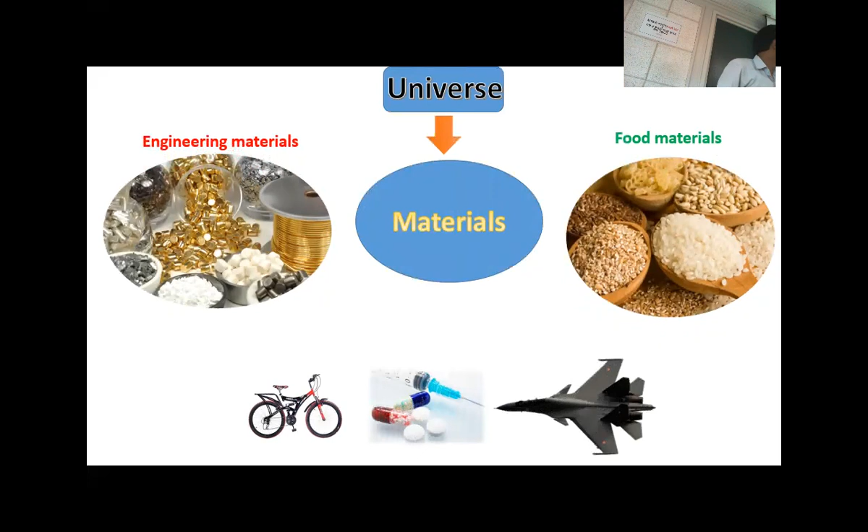Just one for engineering purpose and one for food purpose. These are for civilization, very necessary. It's very introductory, and these materials give us the modern civilization where we are standing today. But interestingly, nature provides these materials in the form of different ores or in natural forms.

It is not as it is that we are going to use for engineering. For example, this is a laptop. We are using silicon. We obtain silicon from ores, but it is not usable as is. So we need a lot of engineering—material engineering, chemical engineering, mechanical engineering, nano engineering. So many things are needed.

So what is the problem? These ores, we need... there is a different engineering, and in science there is a concept. Suppose this is my pen. If we just go and dissect it, the property of the material is not the same everywhere. You can very easily understand this.

Suppose this is the same material, I'm showing it by different colors. Just go and divide it. The properties—I'm talking only about physical properties here—here and here are not equal. It's totally different, maybe sometimes amazing.

You cannot believe it, but the property is different. Here is the same, the only difference is size. Size means you have to understand you are going to divide it, many times through fragmentation. You are getting my point? Sure.

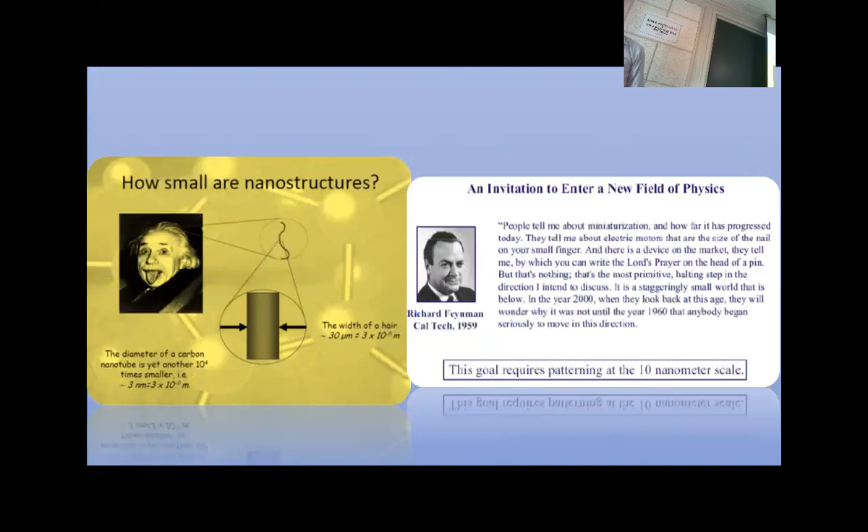So next, what is a nanomaterial? You may be somewhat familiar with the term. Any material—this table, this laptop, me, you, everyone—if it has a size in the range of 1 to 100 nanometers, then it is a nanomaterial. So the definition is that a material must have a size from 1 to 100 nanometers. And the science related to these nanomaterials is nanoscience.

The technology related to and produced due to these materials, we call nanotechnology. So we have to see what is unique and new about these materials. Suppose this is my pen, and if we go to the nano level, what is the difference? Very interestingly, you get new physics, new electronics, and very high surface area.

We will discuss surface area in the next couple of slides. Then aggregation and agglomeration properties - for example, this is my hand, both have different properties, in this we cannot eat, in this we can. This is just an example of aggregation and agglomeration. Surface morphology - we have a lot of chance for surface manipulation in the case of nano, which we will discuss in the next slide.

New solubility - for example, if we have a material not soluble in water, if we go to a smaller nano size, the same material may become highly soluble in water. So we have the same material, but at a different scale, we get different properties. The structural formula may be different, with new surface properties like charge, tension, and hydrophilic and hydrophobic nature.

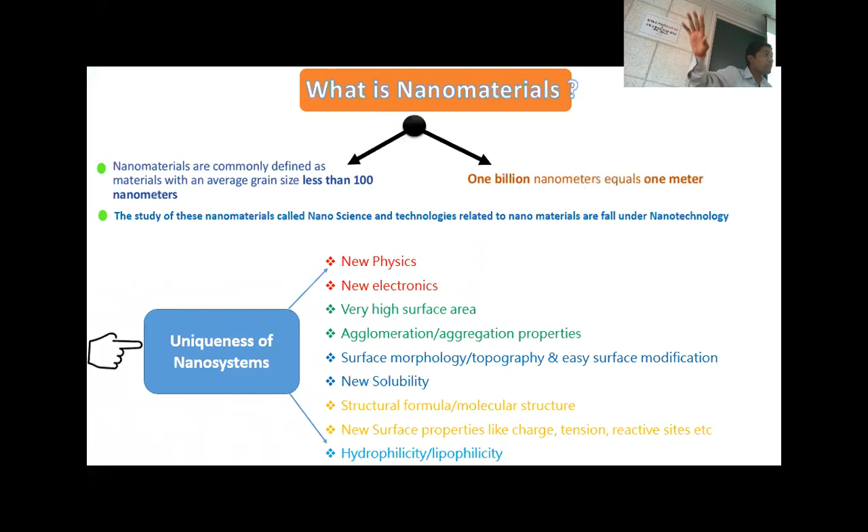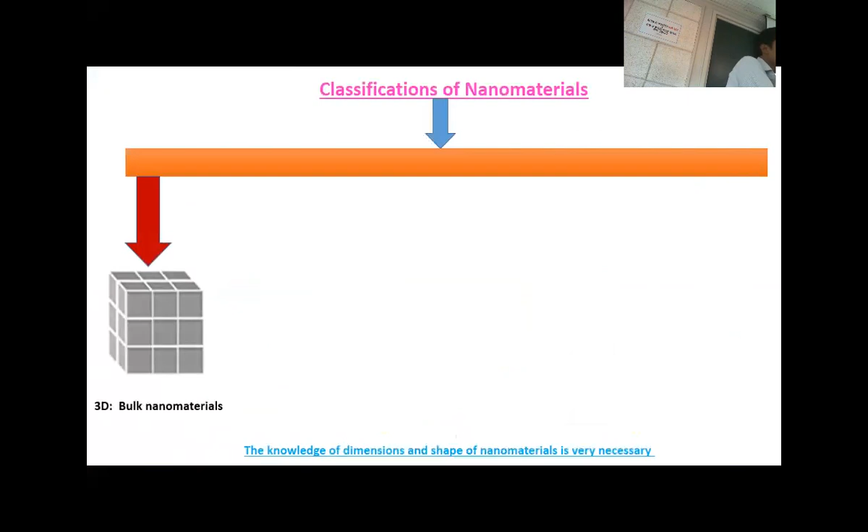So again we go toward classifying the materials - classification by type for nanomaterials. What type of nanomaterial is it? We can easily divide these materials into 4 categories: 3D materials like bulk materials, 2D materials like films and plates, and 1D materials like nanofibers, wires, and spheres. You have to keep in mind the shape.

Now size is just forgotten - now you are in the nano world, size is very important, shape is very important. Suppose you have a 2 nanometer material, but if the shape is 3-dimensional versus 2-dimensional, you may have different properties. So now we have added another point in our definition: the properties of nanomaterial change very significantly with size and shape.

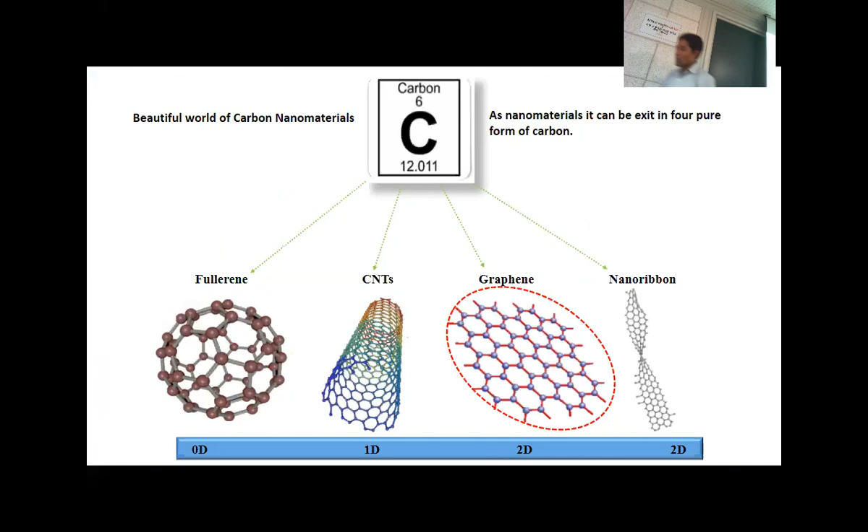So this graphene, now we go in this slide just for your recall. This all four materials can be obtained from the single graphene. So graphene is called the mother of all graphitic systems. How? If you have a graphene sheet, if you just layer it, this becomes graphite. If you just roll it, it becomes carbon nanotube.

If you roll it in this way, it's fullerene. It is not just a theory, it can be produced in a chemical lab. If you adopt different kinds of processes, graphene can produce this. You can produce this, it's quite difficult, but you can produce it. So this means graphene may contain these properties.

So all these three properties are one, that makes graphene much more exciting than the carbon nanotube, because carbon nanotube was discovered previously. It created so much hype, so many applications have been developed. But when graphene was discovered, all its properties were much better than the carbon nanotube.

Reason? Again, we have the role of surface area. Here, if we roll anything, the surface area again goes down. When we just spread it, the surface area goes very high.

Again, one other thing, it was discovered in 2011 or 2012. This is another new material, graphene nano ribbon. If we cut this from here and just try to tilt it, it shows a totally different property. So this is another new nanomaterial, graphene nano ribbon. It's a deformed form of graphene, but its properties give so many new things. What can be obtained after the deformation of graphene? So now we have five: fullerene, carbon nanotube, graphite itself, graphene, and graphene nano ribbon.

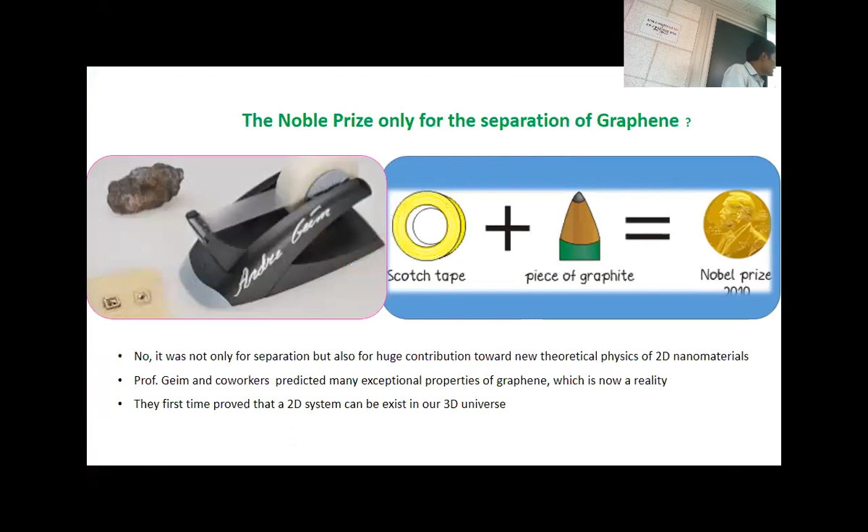Here is the method: they separated it, they took a stone of graphite, rubbed it on tape, and applied many things like chemicals. For the separation we will discuss. This simply shows just tape and a piece of graphite, and they got the Nobel Prize. But this was not only for the separation. As I told before, this is due to the separation and the development of excellent predictions and physics of these nanomaterials. That is the reason they got the Nobel Prize, and they predicted correctly that two-dimensional materials can exist in our three-dimensional world. It is very interesting, after two-dimensional materials, so many materials have been discovered, and they are playing a lot of roles in applications.

So another important thing: nowadays the traditional TV and the LEDs used in our homes are going to be removed within 5 or 6 years. Here, if we go to the nano size, suppose you have graphene of 2 to 10 nanometers, then they show amazing different colors. The same graphene. You are getting my point?

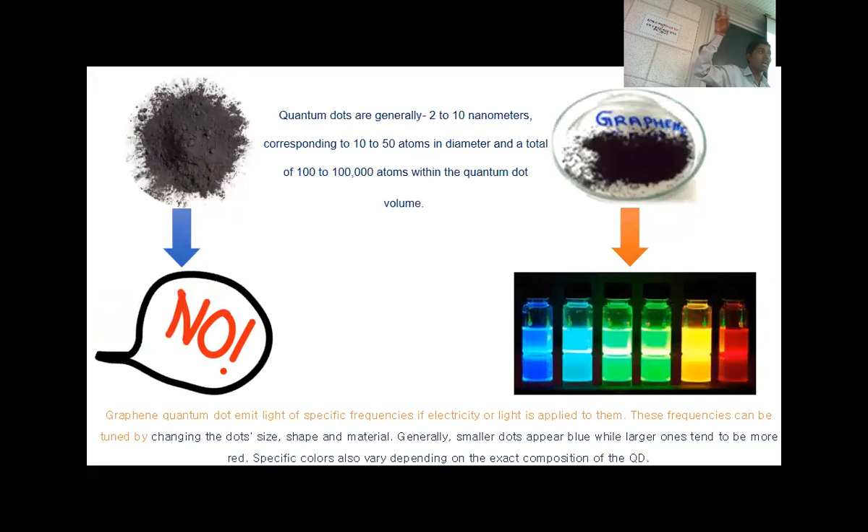And it is a general prediction: when you go to the higher size, you get red color. When you go to the lower size, you see blue color. It's fantastic, with many applications, and now scientists are trying to manipulate these things for artificial photosynthesis. That is very important for the capture of carbon dioxide. So this is the application.

Here, graphite has just normal conductivity, but this has huge conductivity, like no other material in this world. But the problem is that we cannot control it. Till date, we are not able to control the properties of these materials. That is the need for further engineering.

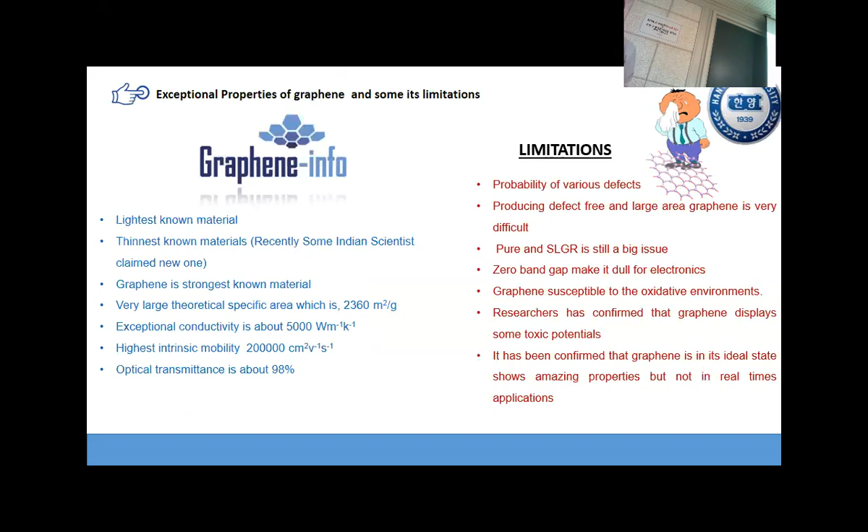The engineers are working on it and have had good success. If we can just push this, then it becomes an amazing material and we can replace all the silicon using this carbon. So this is the problem.

Another problem is now the research that is going on. Previously it was predicted that it's a wonder material, very amazing for the medical system and like that. But now it has been discovered that it also shows very, very low compatibility with the human body. It means it is somewhat toxic. So there is a need to finalize whether they are toxic or not, whether they are biologically active or not.

That's a matter. Another thing is there is a need to further create ideas on how to produce graphene beyond graphite, because the problem with graphite is we have stacked layers. That is the basic problem, because with the method produced by Andre Geim, in one day you cannot produce 1 gram. They got the Nobel Prize because it was an outstanding idea.

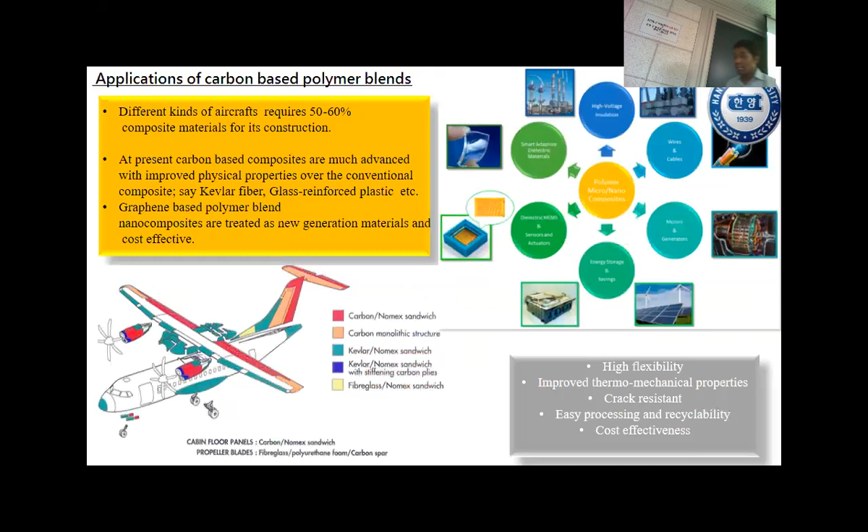Just a very common example. We are all familiar with polycarbonate. Polycarbonate is everywhere in our homes. So these are the different applications of polycarbonate. But what is the problem with polycarbonate? If we have iron and coat it with good materials, we can use it for 10 or 20 years or more.

But with polycarbonate, what is the main problem? After 5 or 6 years, these are the reported problems: swelling, fracture, and cracking. So scientists get 100% recovery if we use these nanomaterials, because if we use single layer graphene, it will be transparent. So the transparency of the polycarbonate will be maintained.

Now the cost may be high, but in coming days, if the research keeps going, it will be much cheaper. And cracking we can recover using these nanomaterials. So our aim would be that we can reform or reconstruct these materials to be reused and recycled. A huge amount of polycarbonate is produced every day, every year, so we can recycle these materials by using different kinds of nanomaterials.

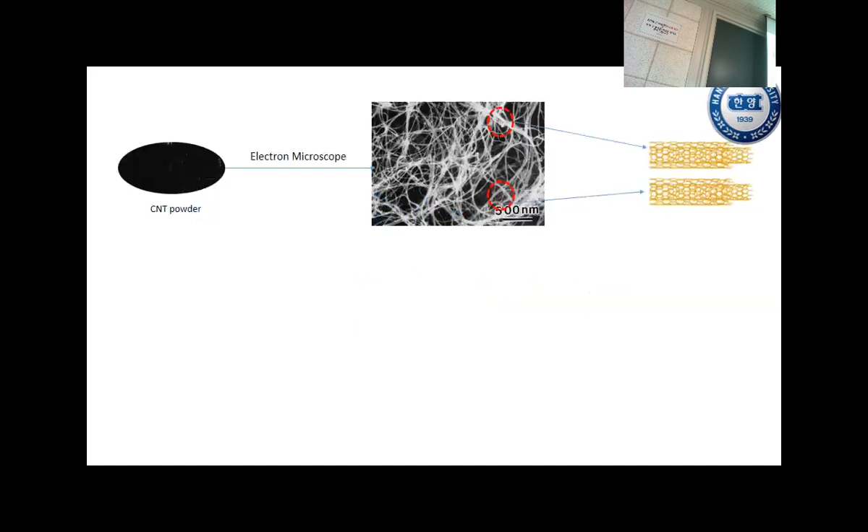Now we come to another example of how it becomes very mechanically strong when we use carbon nanomaterials, especially carbon nanotubes. The carbon nanotube is just like powder. If you purchase it in a bottle, it's just powder. In the electron microscope, it looks like that. This is its structure. Suppose this is the matrix, and this is our fiber. Without it, they are just separated alone.

When we mix CNT, due to the property of CNT, they get entangled. Here you can see. So when the layers are tightly entangled, thermal and mechanical properties increase hugely. This is an MIT report; I have given the references at the end. They propose the mechanical properties and how the matrix and the filler interact, due to this tube-like nature.

Obviously there is a need for processing. You cannot just mix in the carbon nanotubes and get this property. There is a need for some processing like consolidation; we will discuss it. So these are the properties we can obtain in real time for neat polymers. So we can stop producing new polymers, or needing very advanced polymers. We can manipulate existing polymers for elevated and advanced applications using these nanomaterials, because these materials are just advanced.

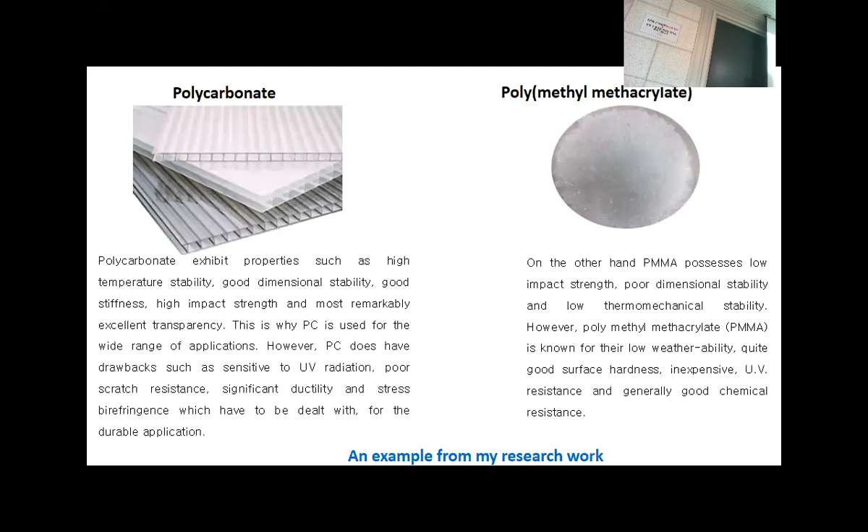So we can resolve it. It is just a prediction, just for the prototype application. But yes, we can produce it. You may ask why we mix. What is the need of mixing? PC is very costly. If we have to produce 10 kg, the price will be very high. If we mix, first is the price. Second, PC is sometimes sensitive to UV radiation, but this is not. So if we mix in the proper ratio, we can manipulate the properties of these materials.

So this is the result. It's just for your introduction to how graphene works, how it fills the gap. You can also find my paper on the internet, showing how the cracking has been removed due to the introduction of these materials. Here we have the neat PC and PMMA. We mixed other samples in different mixing sequences, and we are getting this kind of tensile strength.

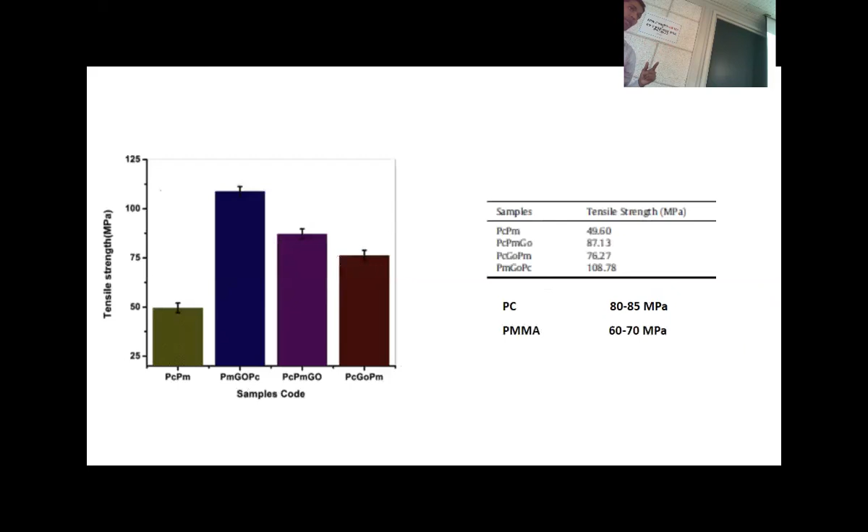So we can control it. Yes, obviously a lot of work is needed. We can work with a lot of systems, a lot of polymers, and produce advanced composites in our lab. At present they may be prototype applications, but in coming days they will be very important for advanced engineering, because engineering and science keep changing. So we cannot just wait on conventional polymers. We have to do something.

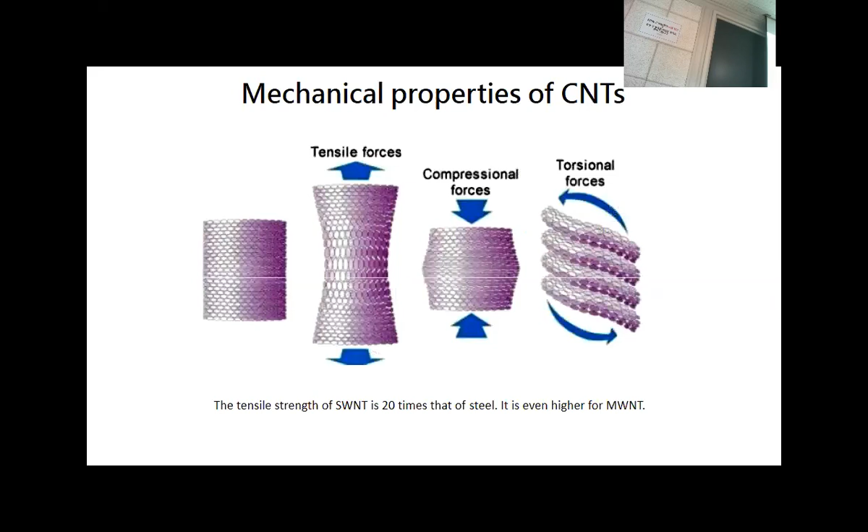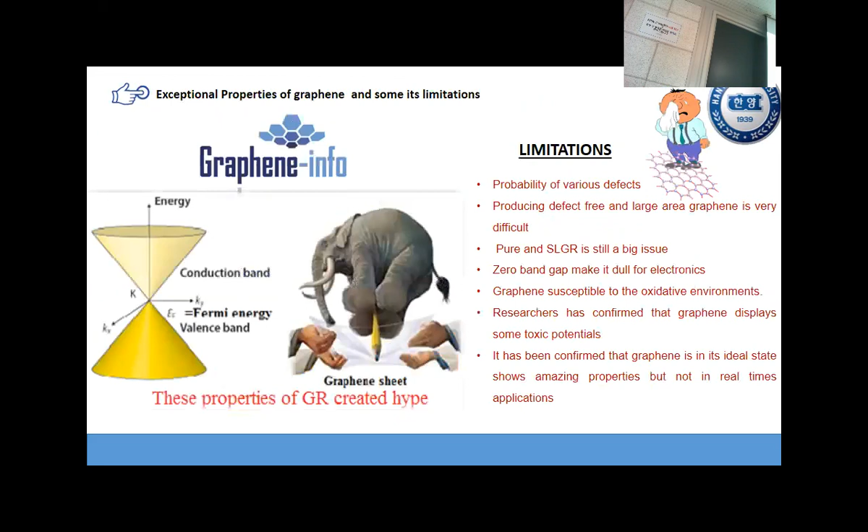These products are in the market, but the cost is very high. Yes, at this point they are in the development stages. Right. And what are the barriers for real production? You mentioned several points, but in your opinion, what are the real barriers?

The real barrier is obviously production: bulk amount of production in pure form. Pure form, without any defect, with a very consistent geometry. Do you think it's possible? Yeah, it's easily possible. It is possible.

What do you suggest to mechanical engineers, in terms of design of certain structures or certain materials? First, it is very interesting if you just Google these materials. Mostly, the work is performed by mechanical engineers. Most of the calculations are performed by mechanical engineers. So this is the new world for the mechanical engineer.

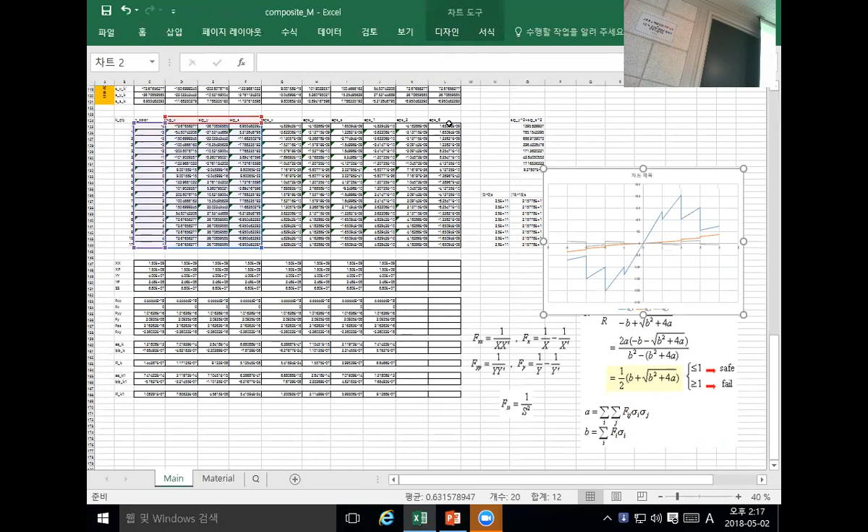Last week we programmed failure index based on the Tsai-Wu failure index, failure criterion.

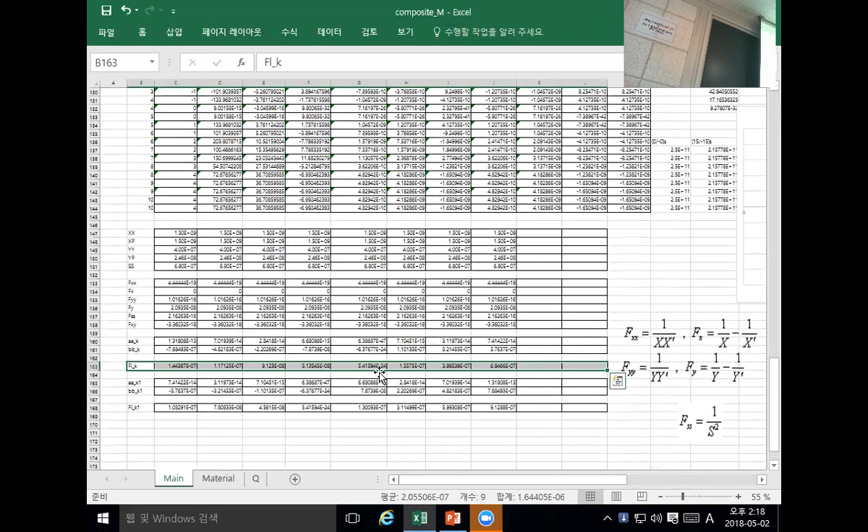Okay, let's see. I like to add plotting graph, failure index. Say this one, I like to. This is the failure index K. I hope you can see. Failure index K, failure index K1 means that each ply you have a bottom and top sub positions.

So we do have a name, and let's say this one. The name was what? F-I-K, so F-I, K-ply, and F-I-K. Why not?

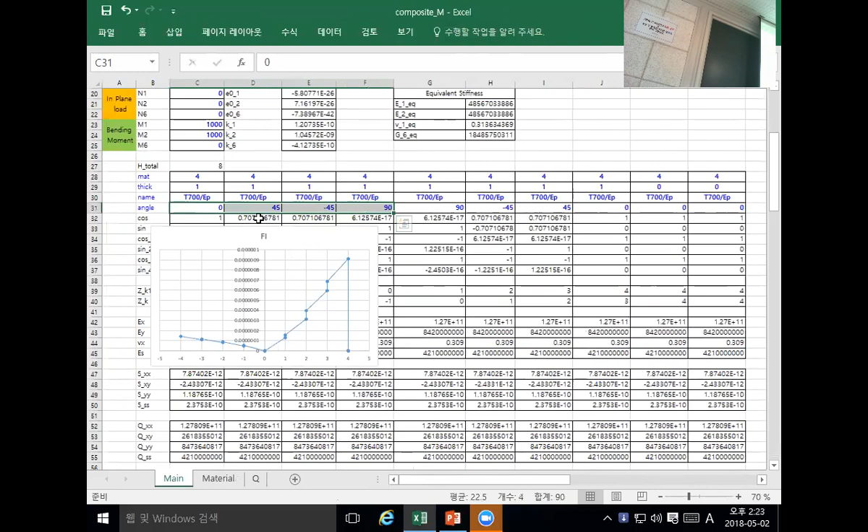Let's double check whether this graph makes sense or not. Well, thickness is chosen as 1 for each ply, 1 millimeter. And the angle, quasi-isotropic, 0, +45, -45, 90, and symmetric. And now we have moment 1 and moment 2. Let's start with a simpler load.

And N1, as you can see, well this is nothing. This one, top and bottom is symmetric. This is the bottom, and this is the top, and this is all symmetric with respect to a neutral axis. Why is this one higher?

Because of this 90 degree. This 90 degree is subject to N1, one directional load, 0 directional load. So this 90 will have a weaker strength. That's why we have a weak, higher failure index. Higher failure index means higher stress.

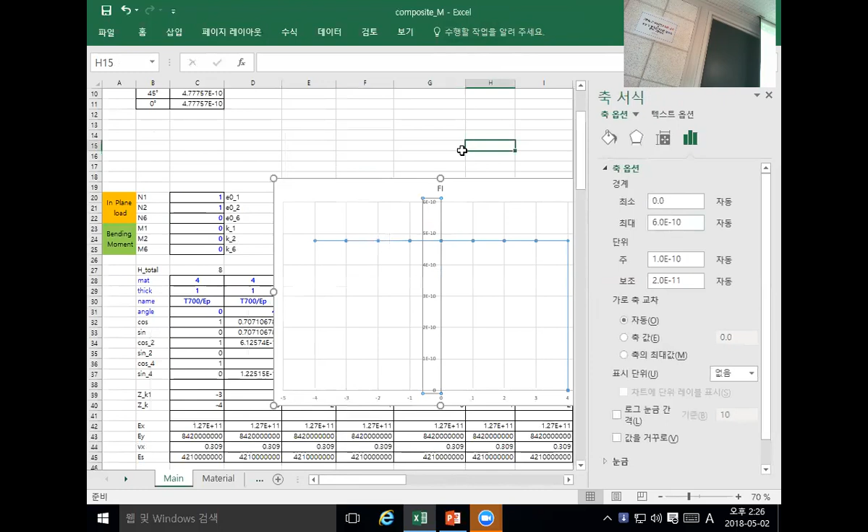Now you can see that this is a very important procedure. Look at the value, okay? Look at the failure index. Failure index is up to about 5, 10 to the minus 10, okay?

Which means that if we increase this much, increase the inverse of this, say we increase approximately, okay, 5 minus 10, let's see what happens.

Now you can see that all the failure index goes very close to... it's not quite correct.

Why is top and bottom different? Well, this is the...

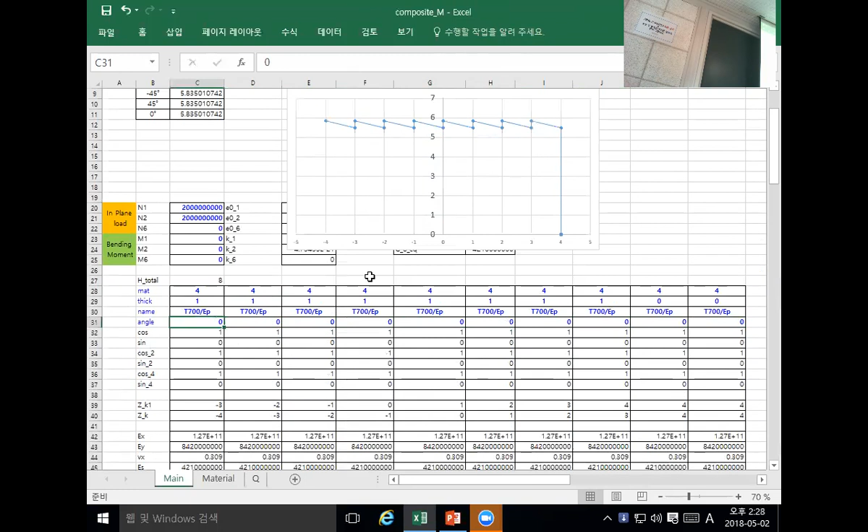Okay, let's change it to all zero. Well, as I emphasized before, we are often facing some bugs, and I'd like to share with you how to fix the bug together.

Say we apply N1 and N2, and all the plies are 0 degree. When you have some bug and error, how do you know this is a bug and error? Well, first you need to have a rationale. How come it's up and down, they are different. This is certainly not right.

So to find what caused the error, we always need to simplify the problem. Simplify means let's make all the plies 0 like that, and let's say even simpler. This is okay, and now, oops.

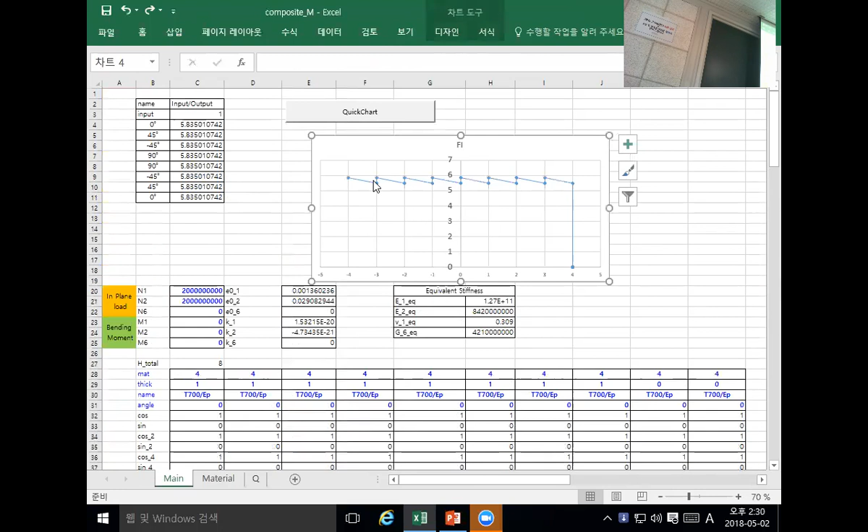Oh, I'm sorry, I didn't pay attention. 5.4, 5.8. Okay, let's go, and then okay, so this is the point. Here, failure index, the bottom one is 5.8. Top is 5.48, and second top, so this one is not continuous.

That is not right, so let's find out. Here, this guy is the A and B, and these A and B, in the theory, we have A and B to calculate R, right? And this A and B, and this A and B, they are different. So I think this one refers to this, and this B refers to, okay.

Now this one, how about the stresses? Well, as you can see that this stress and that stress-wise, okay, the top and bottom surface of each ply, they have the same stresses, but why is this one different?

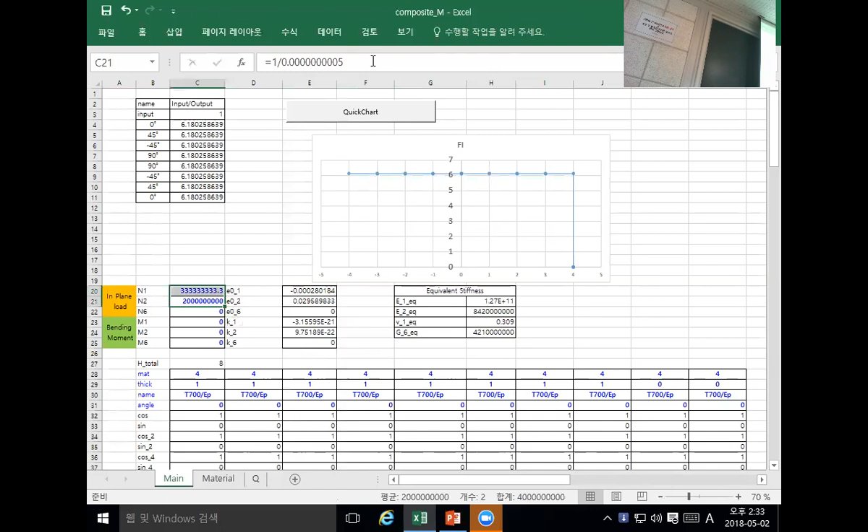Now what I'd like to emphasize is the failure index of 6. 6 means 6 times higher than strength. So then how much load can this plate, I mean the laminate, support? Can you easily calculate? Yes, we can. This is a 6. What we need to do is just divide by 6. Divide by 6, it's not a complicated procedure.

I like to give an engineering sense that, you know, all the failure indices, we have to design so that the failure index of all plies has to be 1. For that purpose, we just decrease all the load level proportionally. This is the important point. Proportionally, we have to divide by the same amount. Then this will just go up and down. This is an important procedure.

Now, this N1 and N2 is an in-plane load. What is the in-plane load? N1 in-plane load is the stress times thickness, right? In-plane load is stress times thickness. So let's think about this one.

Only in the N1 direction we apply this, and all 0 degree. And what is the thickness? Well, thickness now 8 has no unit here.

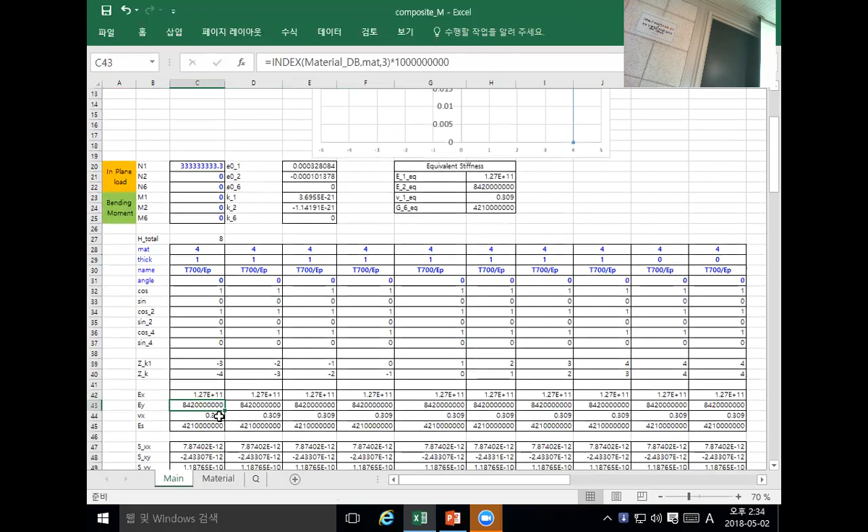Okay, the unit, we need to be very careful, obviously, in every tool, CAE tools and even CAD programs, especially in CAE tools, they don't have any unit system. We designers have to choose the unit. The unit has to be very consistent.

If we choose this one, for example, EX, EY, and all the material properties are in Pascal, right? So Pascal is the unit we chose, and then all the dimensions better be in meters, right? Meters, and load has to be in Newton. So if we say 1, meaning that this is 1 meter.

So this one, okay, let's choose thickness. Well, I'm sure we didn't pay attention to a real unit, but let's make it a real unit. Say, 0.125 millimeter is the conventional ply thickness. So 0.125, this is in meters.

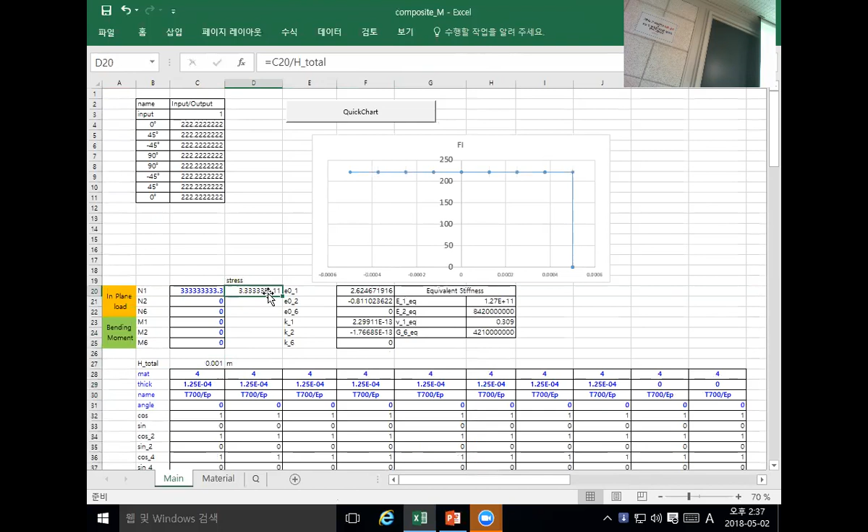So this is the 333 gigapascal, right? Gigapascal we are applying. As you can see, the failure index is 200. So what's the value? 222 point. Okay, so let's divide.

Then as you can see, failure index will be precisely 1. Then as you can see, this is the stress we are applying. What does this value, what is this value related to?

Okay, this is the 1.5 gigapascal we are applying. What is 1.5 gigapascal? Well, that is the strength he chose, 1.5 gigapascal, because this is the X directional strength, and we stack as many as we like, and we applied N1, but strength-wise, this is 1.5 gigapascal. So as you can see here, it reaches 1. I'm trying to explain what the failure index means in a simple way.

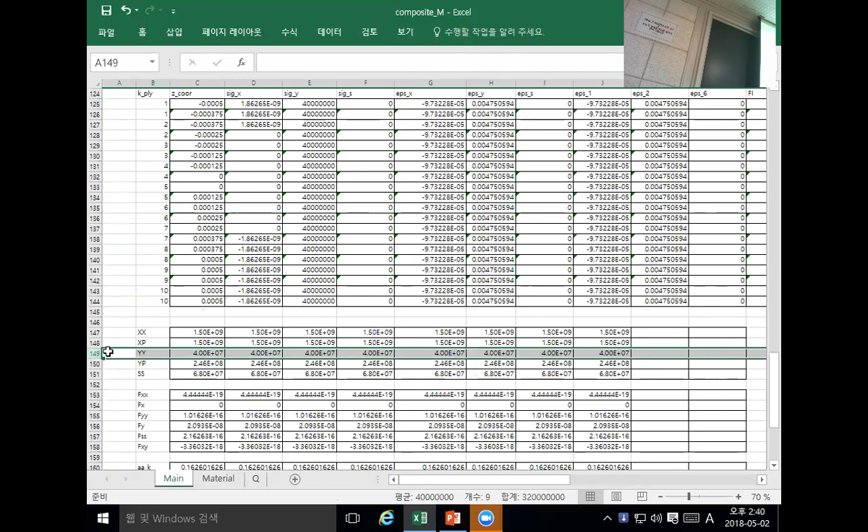We can increase the load by how much? As much as the failure index allows, then you can increase it to 1. And this is the amount in plane load you can apply. Stress-wise it's 40 megapascal in N2 direction, which means that this is 0 degree, and N2 direction, meaning 90 degree transverse tensile strength, right? Transverse tensile strength, I'm sure this is the y directional tensile strength.

That's the amount you can apply, and the material will fail at that point. Okay, so now you can say, you know, any load you can apply, any load, and how much failure index we have. Well, only one directional load is easy, but multi or biaxial load, such as this way, is not easy to predict.

So as a designer, how much do we need to apply by just looking at this one? There's a 1.158, and then you can divide by 1.158, and as you can see that now failure index reaches 1.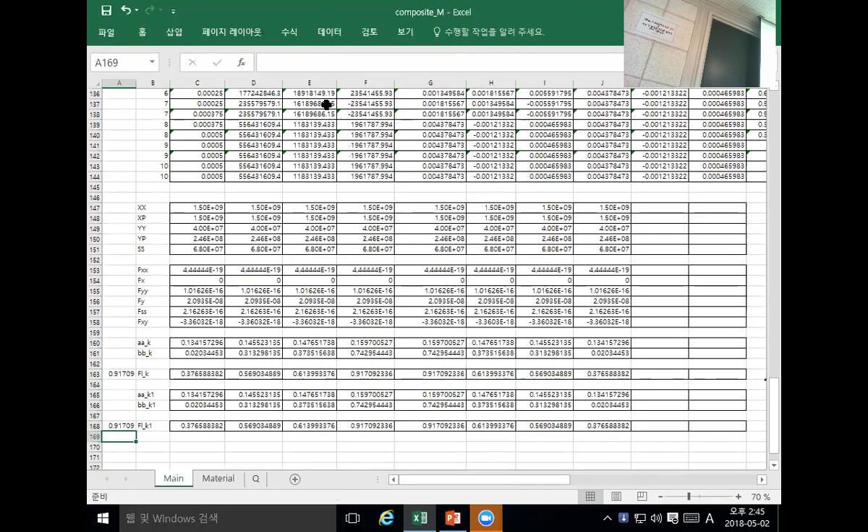Let's define the maximum of this failure index. So this is the maximum of a failure index, FI_k, and this one also maximum of this one. Okay, so let's say input, and this is the maximum failure index, maximum of failure, K, K1.

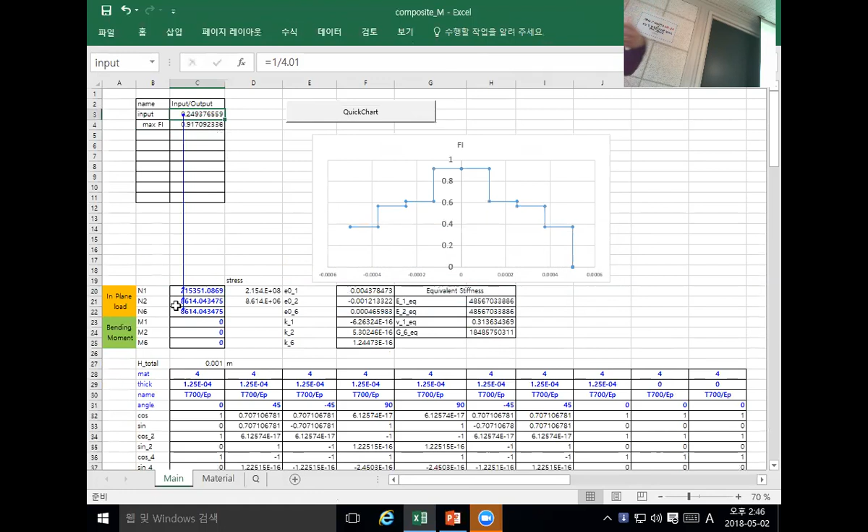Okay, what I'm trying to do is change this input and see how this failure index varies. It's certainly proportional to this load. Do you see what I'm trying to see? And as you can see, this input value goes here, proportionally increasing the load, all the way you go, and then come back to this failure index. So whatever we change, as you can see, the failure index is increasing.

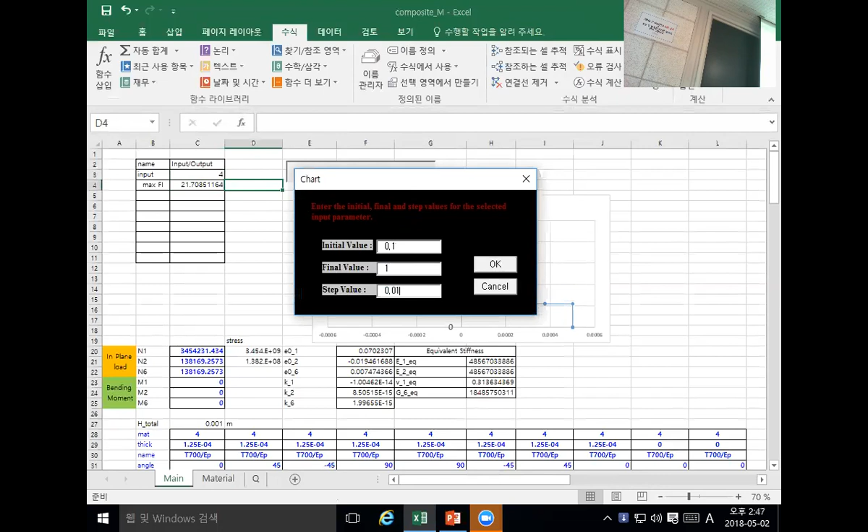So let's try to start from point 1 to a point, how much? Okay, we can go 1 and 0.01. Yes, it's pretty much linear.

Not quite linear, huh? But something is wrong. Yes, something is wrong. Very difficult to find, because if the value is very large, then it's easy to find. But this one value is very small. Anything less. Huh. Okay, well, it certainly has some bug, a very small bug. A smaller bug is more difficult to find. But let's move to the next one, and then I will get back to this one.

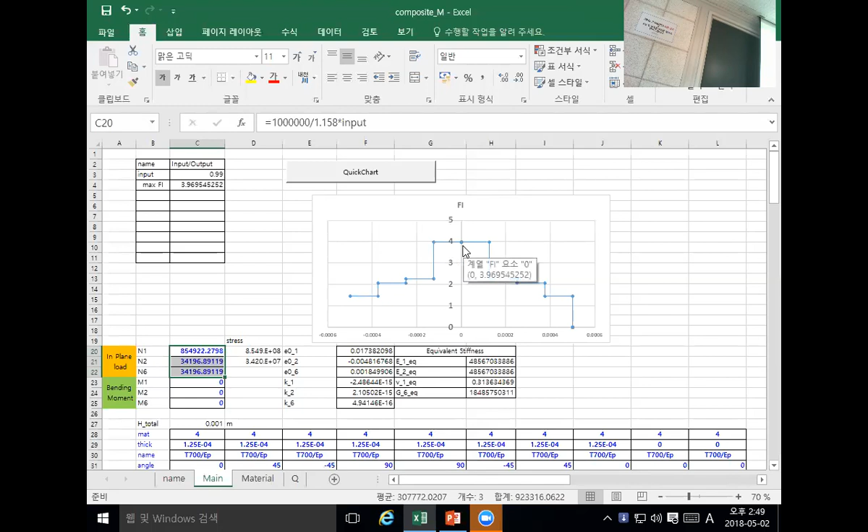But you can see the idea. What is the meaning of the failure index? What are the loads you apply? Okay, it's not much magic. The failure index just represents the stress level. If we increase the load, the failure index will certainly increase. There are so many different stresses, sigma x, sigma y, and so on, but the failure index is only one value which represents the strength level. It's very easy, and it helps us design structures.

So now I'd like to add a temperature effect. The temperature effect is as important as the mechanical load. So let's get back to what's called thermal stresses. What is thermal stress? Well, thermal stresses or thermal expansion mismatch could happen to any structures, any products, any materials. Not just composite materials, even metals, especially two different materials bonded together and subject to the same temperature; then it will unexpectedly deform.

Mainly why? Well, there are two different issues: two different stiffnesses and two different coefficients of thermal expansion, which we call CTE. So two material properties cause these thermal stresses inside. One is the stiffness, the other one is the CTE. Okay, I'd like to review the CTE and a very simple concept of temperature effects.

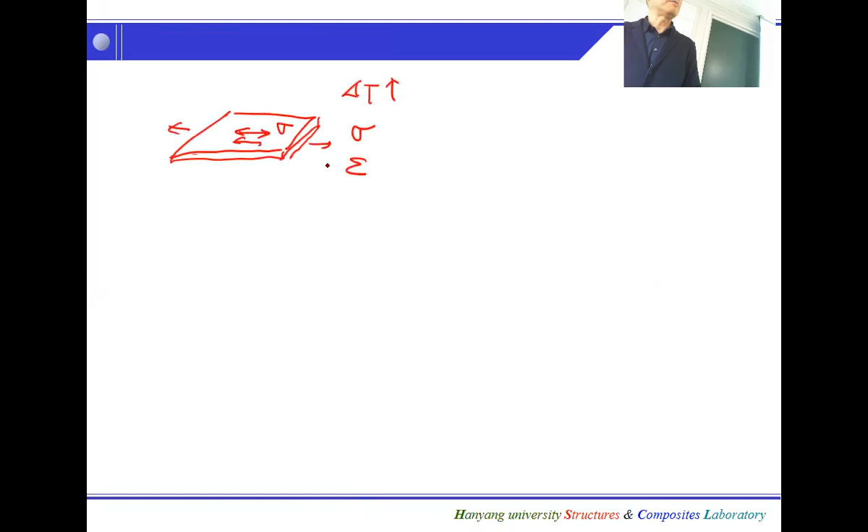Say we have a certain material, say steel or aluminum, and we increase the delta T from the reference. We always like to observe the stress or strain. For stress we have three components, etc., but forget the complicated one. Let's pay attention to a one-dimensional case: sigma in this direction and strain in this direction. So, sigma or strain, when we have a temperature increase.

The point is that this is a free boundary condition. Free boundary condition means it freely expands, so there will be no stress. Why? It freely expands, but the strain is certainly not zero; there is a certain amount of expansion. That is the starting point. Now let's recall the stress, strain, temperature relations. Usually sigma and epsilon are related by the material stiffness. But with a non-zero temperature, there is a temperature-dependent term, and strain is proportional to the temperature increment. That coefficient is called the CTE, alpha.

Alpha is the coefficient of thermal expansion, called CTE. Since temperature is in C or F, the unit of alpha is simply 1 over C. This alpha is very much a material property. Steel has an alpha, aluminum has an alpha. Alpha is in the range of 10 to the minus 6, multiplied by 10 or 20 or 60 or whatever value. So say you want a 1% strain, you can see how much temperature increase you need.

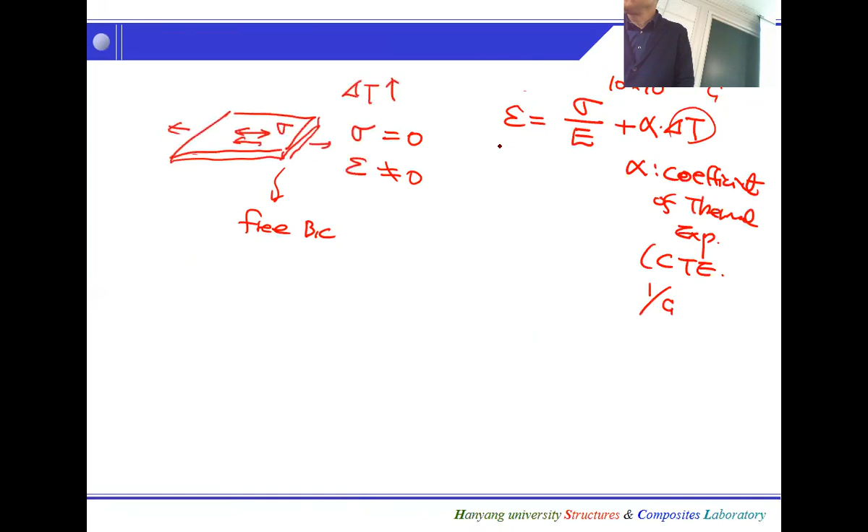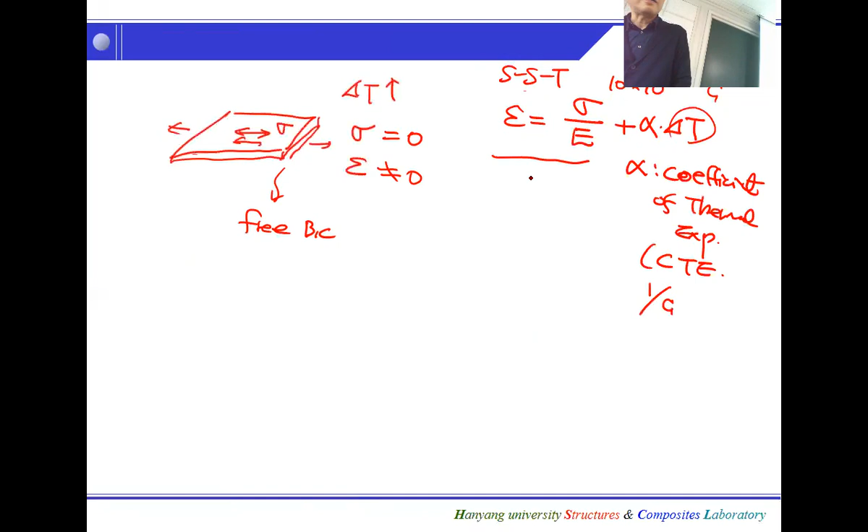And as you can see, if the temperature decreases, the material likes to shrink, and if the temperature increases, it expands. This is a very simple constitutive equation. We used to have strain and stress, but now we have a temperature term: a stress, strain, and temperature relation. This is basic mechanics of materials. Now, we'd like to constrain both ends and then increase the temperature. What will happen? Okay, sorry.

We have another one, the same material, but with a different boundary condition. This boundary condition will constrain the structure from expanding. So in this case, again delta T increases, and now the strain is 0. Why? There is no free expansion, so zero strain. To meet this zero strain, the stress has to be non-zero. There's a certain amount; actually it is compression, negative.

So if we look at the stress strain temperature relations, for the free case sigma equals 0, so strain equals stress over E, which is 0, plus alpha delta T. You can see immediately how much expansion we have, depending on how much we increase the temperature. Now the same equation applied to the second case: strain is 0, equal to sigma over E plus alpha delta T. So sigma equals minus E alpha delta T. This compressive stress has to develop inside the material to meet zero strain.

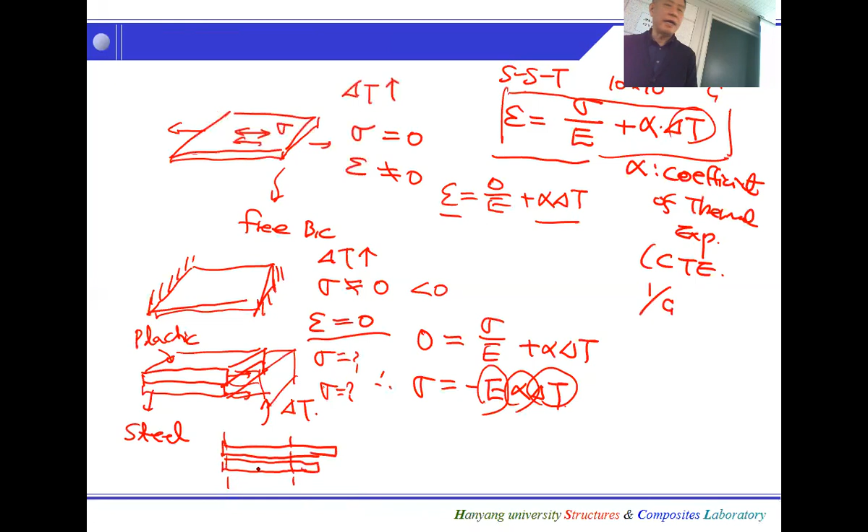So this one was the original length, and delta T would give us this much free extension and this much free expansion. But in reality, they have to deform together, so deformation will be over here, which means that the steel needs to expand, subject to tension, and the plastic is subject to compression.

So this force and that force have to be the same. Why? Because externally, no F. We don't apply any external load. So this is the sigma of the plastic, sigma of the steel. That is, compressive stresses need to be developed in plastic, and tensile stresses need to be developed in steel. Okay, it's called equilibrium conditions.

Now, when we calculate this sigma, we have strain, sigma, Young's modulus and alpha delta T. You have the same equations for plastic and steel. This is steel, and this is the plastic. So equilibrium-wise, force has to be the same, and strain has to be the same because they deform together. And from these two conditions, we can calculate.

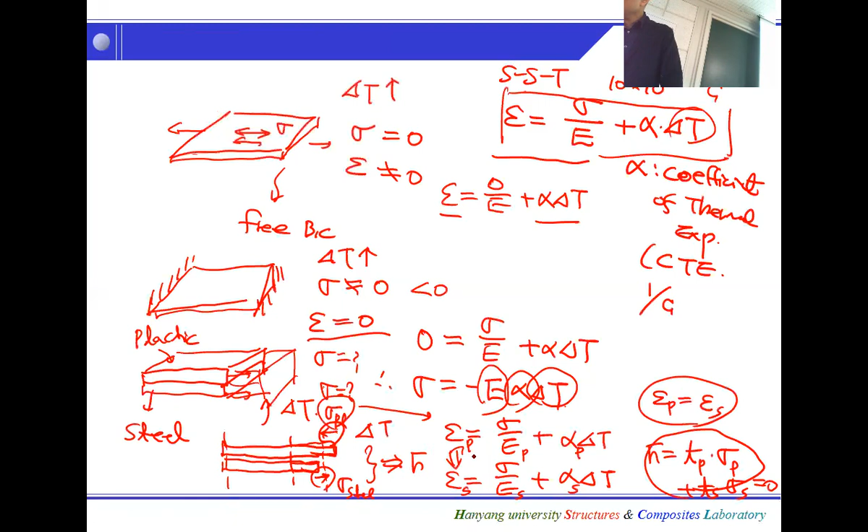And another equation: this is the plastic, this is the steel. These two, plastic strain and steel strain, have to deform together. Why? Again, they are attached together. So this is geometric compatibility, and each one has its constitutive equation, one and two. So how many equations do we have? It's very important to understand. Material properties 1, 2, geometric compatibility 3, and force equilibrium 4. So we have 4 equations.

How many unknowns do we have? Well, we have strain, stress, strain, and stress. So we have 4 unknowns, which can be calculated from these four conditions. Okay, so this is a very important concept. And of course, in the real world, with this geometry, this will bend like a bimetal. In that case, we just modify this. We will have a curvature, but conceptually it's similar.

Now we'd like to take this concept, extend it, and apply it to a composite. Now each ply is not just 1D. We have stiffness, transverse stiffness, shear stiffness, and CTE, this alpha, alpha X and alpha Y, all different material properties. And this one also has all different material properties. Why? Because each ply has a different angle.

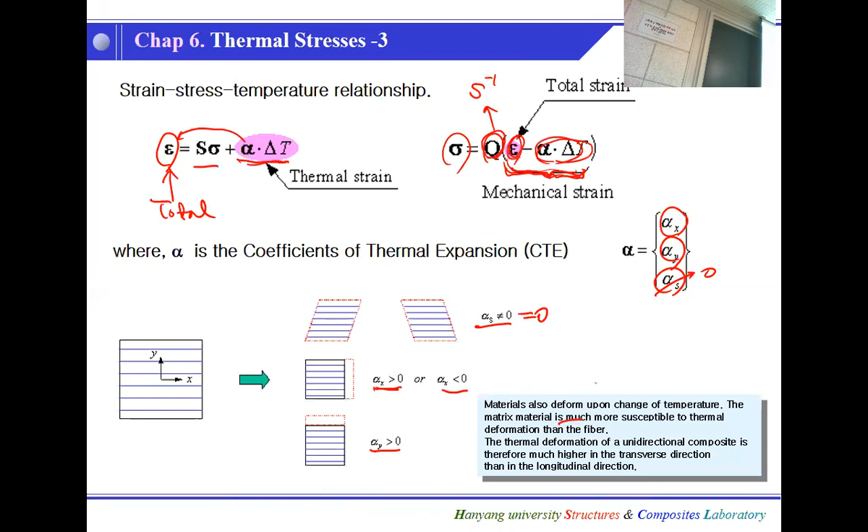And y-directional is the same; positive and negative are expansion and contraction. And the shear term: if temperature increases, will we have shear or not? By symmetry, this has to be 0. By symmetry, we cannot have this term, so this one is usually 0. Okay, so this is the material property, stress, strain, temperature for each ply, and now we'd like to stack them with different axes, as I mentioned.

So these are the equations, and we know how to change Q to Q bar, and we need to know how to rotate alpha to alpha bar. How to do that? Well, alpha delta T is nothing but strain. This is a strain.

So alpha transformation is the same as the strain transformation. So this alpha 1 bar is alpha x, alpha y, alpha s. We need to apply. M is the what? Cosine theta. Okay, this is the theta, cosine theta, n is a sine theta, and we use this multiplication to get this one. This one is from strain transformations. But again, as I mentioned, this term is usually 0, so we don't have to consider these terms.

But as you can see, alpha 6, what is alpha 6? Alpha 6 is like this. With a temperature increase, this will have a certain deformation like that. Shear strain will develop. That is the alpha 6. Alpha 6 is non-zero because of this alpha x and alpha y, we have a certain angle. Okay.

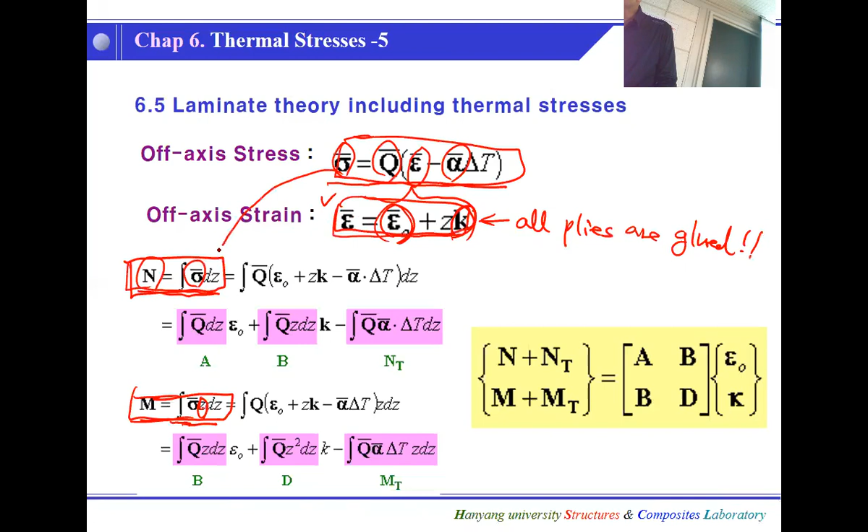And this is the external load, as we did for the in-plane and bending moment. Now, all you need to do is just put it here. Sigma bar, put this one into here, and this epsilon bar, put these things. So this one and that. This is exactly the same procedure we did to derive the A, B, D matrix. The only term we are adding is the new term, this guy, and see how it goes.

So integrate over the thickness. What is the epsilon 0? This is the in-plane strain. This is a constant over z, right? The only z dependency is this z there. So epsilon 0 is out of the integration. Now the second term, Q bar and z and dz. Q bar, as we all know, is a function of z, because of all the rotation, so that term cannot be out of the integration. But epsilon 0 and curvature are constant, out of the integration.

Now this is a new term: Q bar, alpha bar, and delta T. This is the new term we have to calculate. So if we put these terms on the left-hand side, we will get N plus NT. This NT is not the external load. As you can see, it's only due to temperature and material properties.

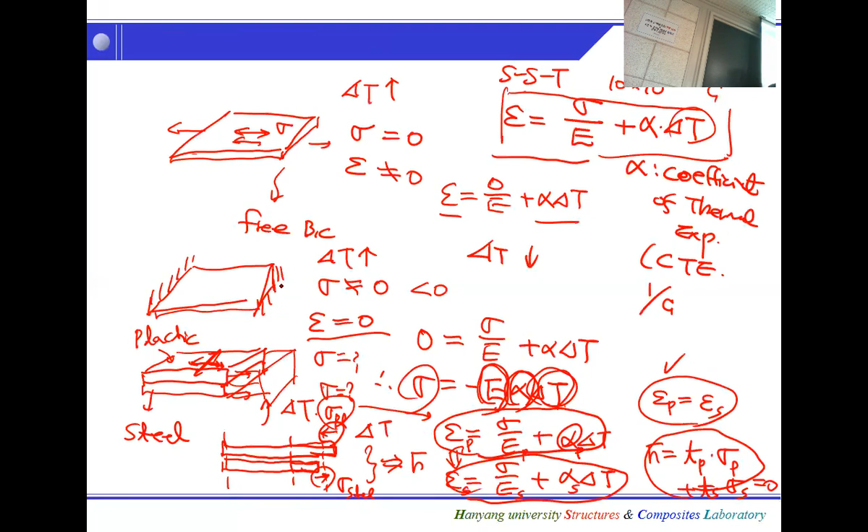caused by delta T. When we stack them, constrained by the other ply, it cannot freely expand, so that much stress will develop, E alpha delta T. So stiffness, CTE, and delta T act as the mechanical load, thermal load. And here we have the z terms. Okay, so to consider the temperature effect, what do we need to do? We need to program NT and MT, which is this guy, this one.

Okay, that's the one we'd like to cover today. And imagine that Q is the dimension of what? A 3x3 matrix. And alpha is what? A 3x1 matrix. So Q is like this, Q11 and Q12, and alpha is alpha 1, alpha 2, and alpha 3. And then you can see that this is the A vector. And as you can see here, N is also a vector, 3 terms. Okay?

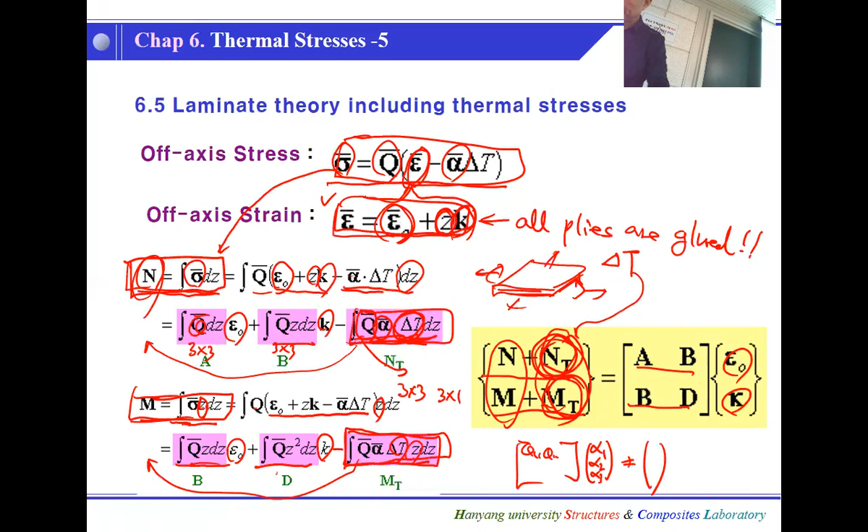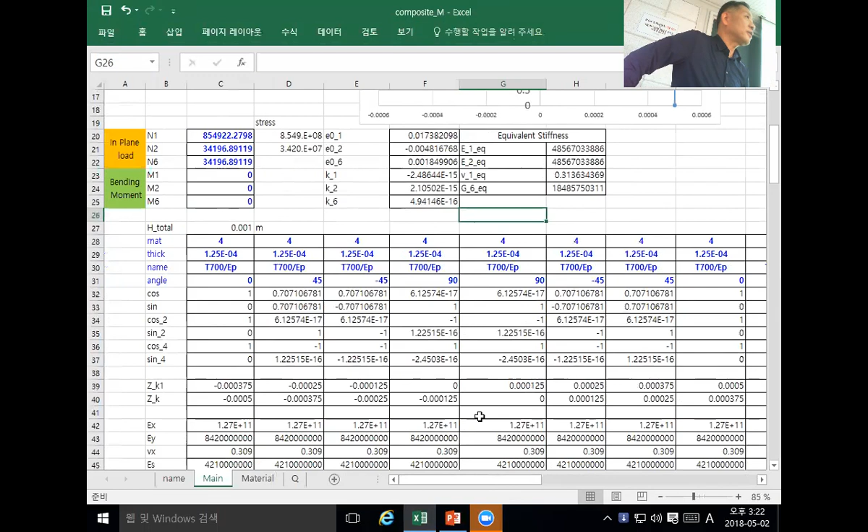As you know, the composite can easily fail just with the temperature. Using these tools, you can predict bimetal, meaning aluminum and steel. All you need to do is just change the material properties and the temperature, and you can see how much it deforms and how much stress will be caused in each layer. Or not only bimetal, you can have multiple layers. So isotropic is the simple case of this.

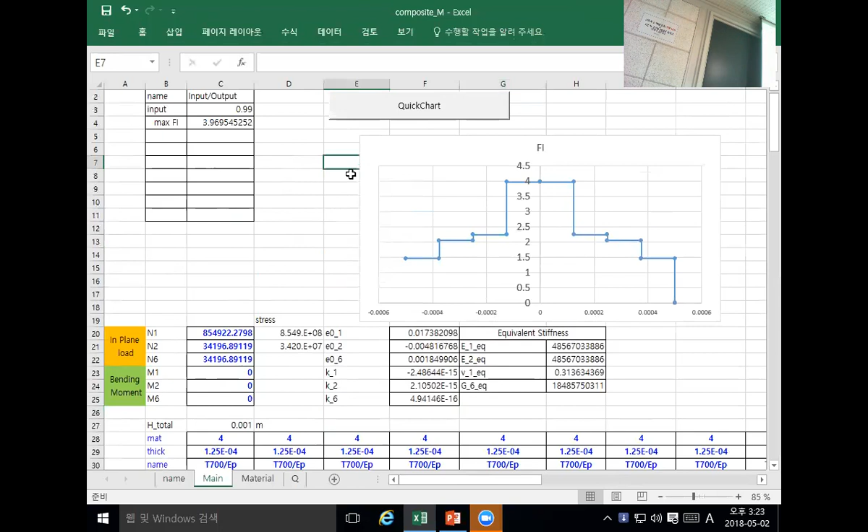So anyhow, let's program this. As a first step, what do we need to do? Well, we have a new term, which is the alpha. Alpha has to be transformed from on axis to off axis. Let's first define alpha. So in the material database, say X and X prime, Y and Y prime, and S, you define, and also alpha X and alpha Y. No shear terms. So we have 11 and 12. Since it's a material property, let's add it here.

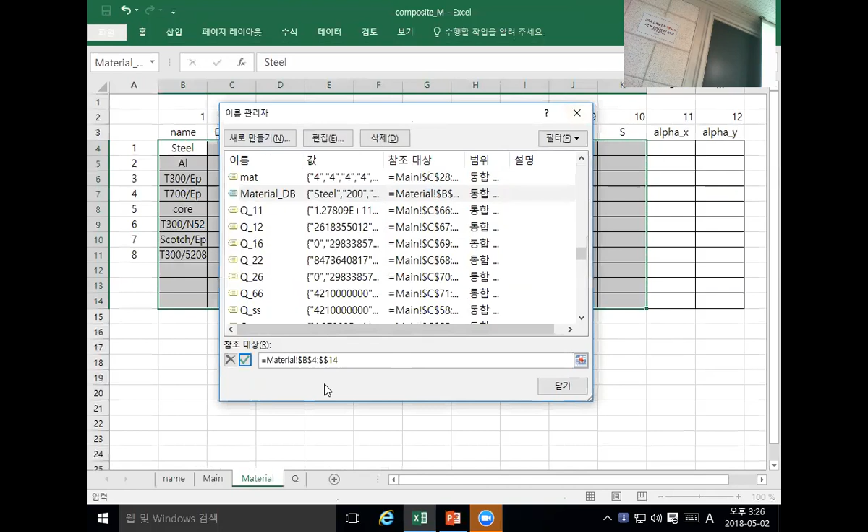So let's say alpha X and alpha Y. Oops. Sometimes we have a limited material database up to here. How to extend it? We need to go to materials DB and simply extend it to cover up to M. Okay, so now we have this much material database.

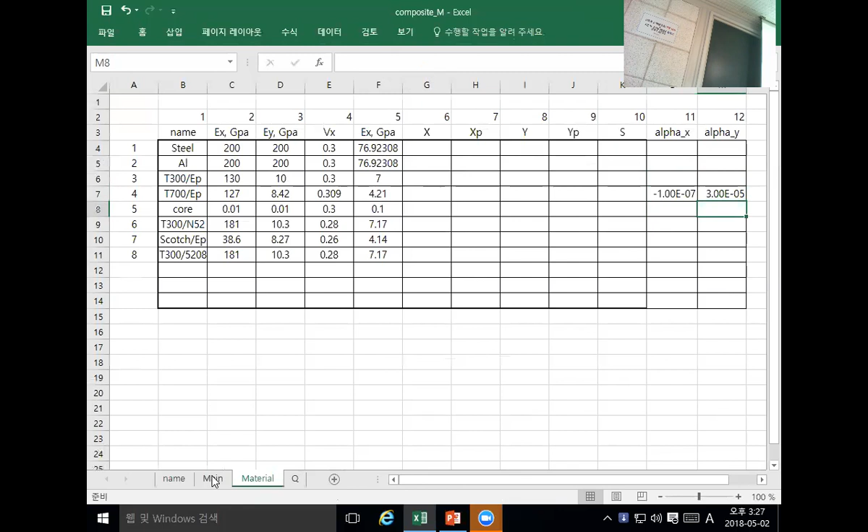Let's give some value here. Since we are using material 4, and material 4 is the T700, alpha X is a very small value. You can say it's almost 0, but not 0. So -0.1 times 10 to the minus 6. And this one is about 30 times 10 to the minus 6. So this is alpha X and alpha Y. Copy, paste, and give a name. Okay, now we have alpha X and alpha Y.

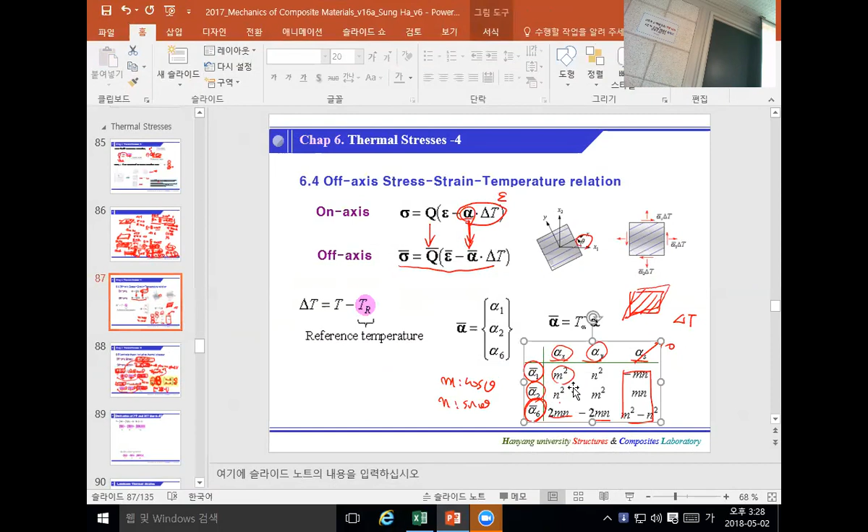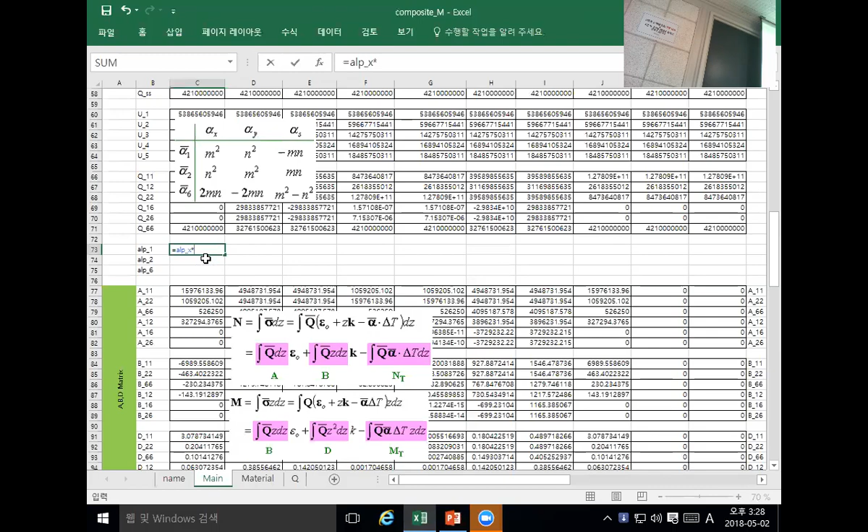Let's copy and paste. This one will be sine and cos, and twice mn, 2 times cos, minus, and this will be minus. Okay, so we have this, and depending on the angle for each ply, all the CTE will be different. Now let's name this term alpha 1 to 6. Now this one is done.

Next one is what? Q bar, alpha bar. Well, we do have Q bar here and alpha bar. Next, we also need delta T, right? Let's define delta T, all the same, or we can apply delta T to each ply separately, or uniform. So let's say the temperature dropped this much. Now we have delta T, alpha, and Q bar. Now the point is how do we program this?

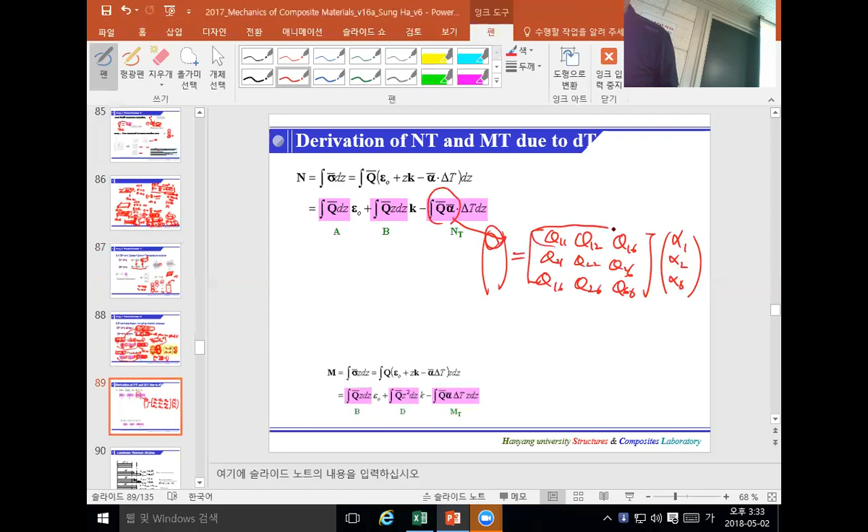Okay, these terms: Q11, Q12, Q16 times alpha1, alpha2, alpha6. And this is Q21, or Q12, Q22, and Q26, and Q16, Q26, Q66. So the first term will be this multiply this, and second term will be this multiply this, right? So that's the one I'm trying to write down here.

Q12 and alpha2, and Q16 and alpha6. Right? And then we need to multiply delta delta T. Each ply we have a delta T.

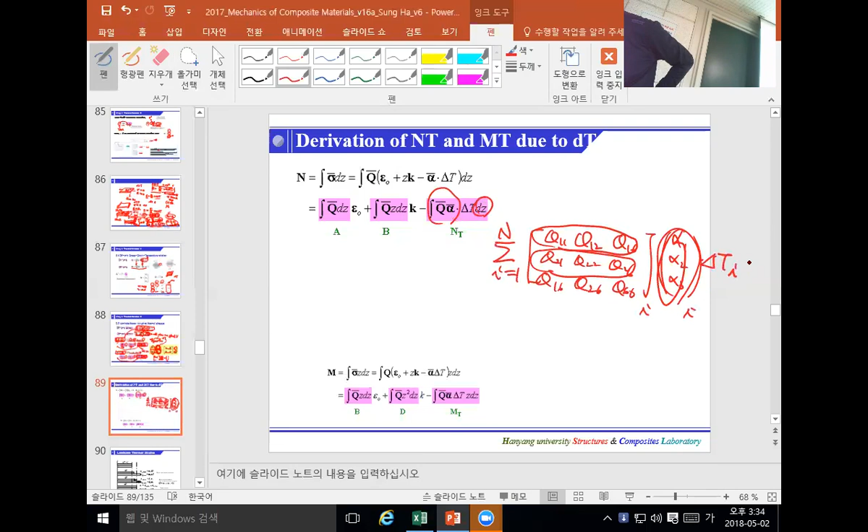Right? And also one thing here is what? A dz. DZ means that we need to do summations, here delta T i, and i up to n. This is all i, and delta z means that we have all the thickness, each ply thickness, Hi, we have to multiply and we have to sum all the plies.

Okay, we are entering these terms. So here, delta T multiply the thickness. What is the thickness here? Well, thickness, we can see that thickness is this one. Okay, so this one, and copy all up to here.

And then, as I mentioned, this is the integration. Integration means that, let me integrate to here. External term, this is all summations of the whole terms. That is the first one.

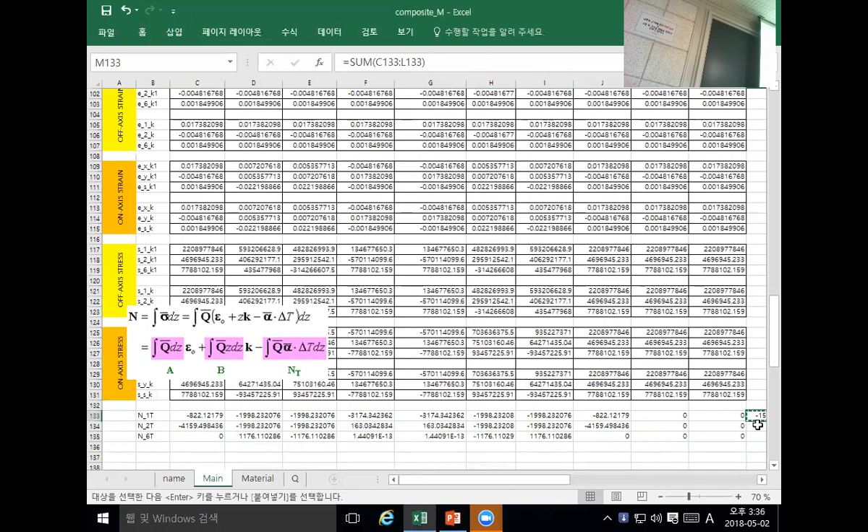Okay, so this one is the N1, I mean NT thermal term, and now another one will be moment 1 thermal, moment 2 thermal, moment 6 thermal, and the only difference now is that... wait a minute. Okay, these terms, Q bar, alpha bar, delta T up to, is the same, but there is a Z term, similar to here.

When you have a Z, how did we do here? We multiply like that, right? So with that in mind, we have multiplications here, and I will just copy here and here.

Some moment, exactly same, but instead of this thickness, we need to multiply this one, because this Z, when integrated, will be Z squared minus Z squared, top and bottom. Okay, so that, and exactly the same, and here we have to have these terms.

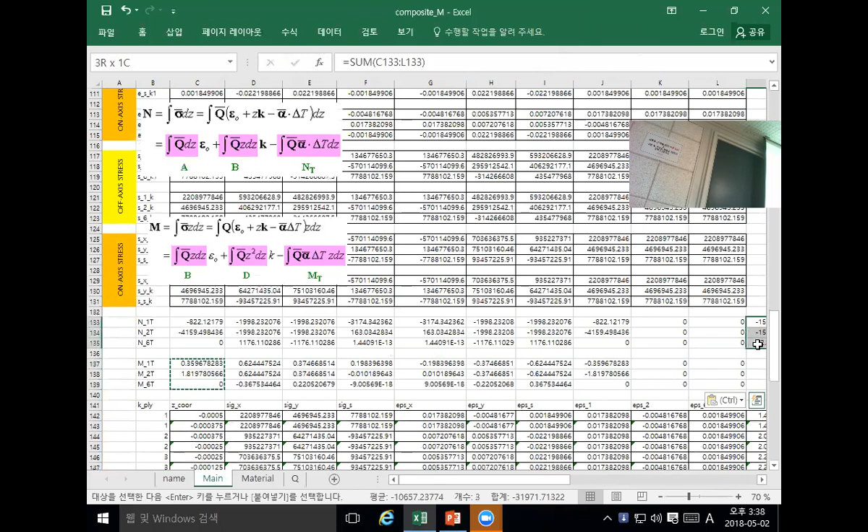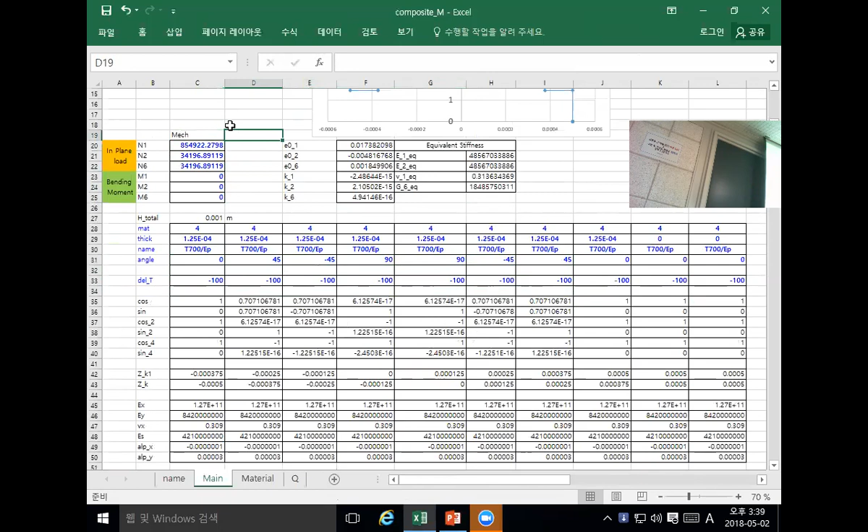So as sum, we just sum here, okay? There is no moment, even though we have temperatures, no moment. Why? Because these are all symmetric. But anyhow, we do have an external load, and now this is the mechanical load, and this is the thermal load.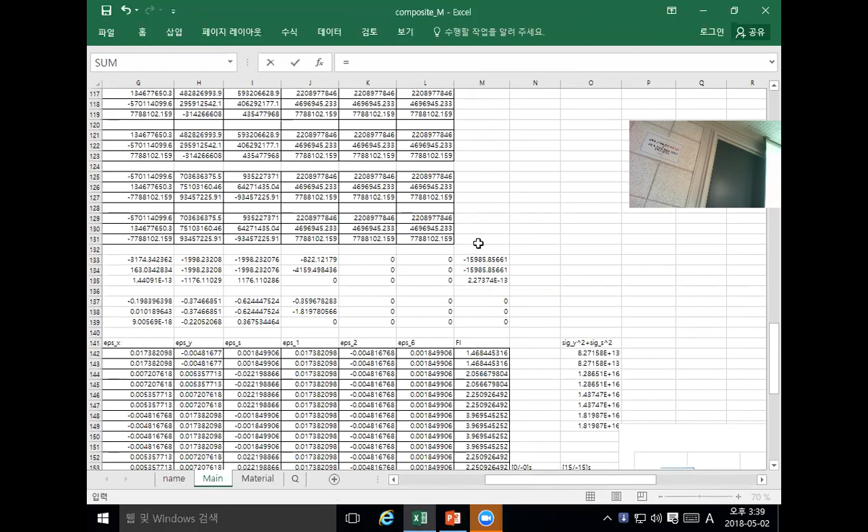And this one, where are we? Here. Okay, this one is the one. I will put this one into here. See, this NT can be on the left-hand side. This N is the mechanical load, and this NT is the left-hand side, which we just calculated. So we copy and paste, and this is the N1T, N2T, and N6T, and this is the moment.

So when we calculate this ABD matrix load, what is the load? Load was this mechanical load, but now we like to add this thermal. So we give this one, and this is the, let's give a name as thermal.

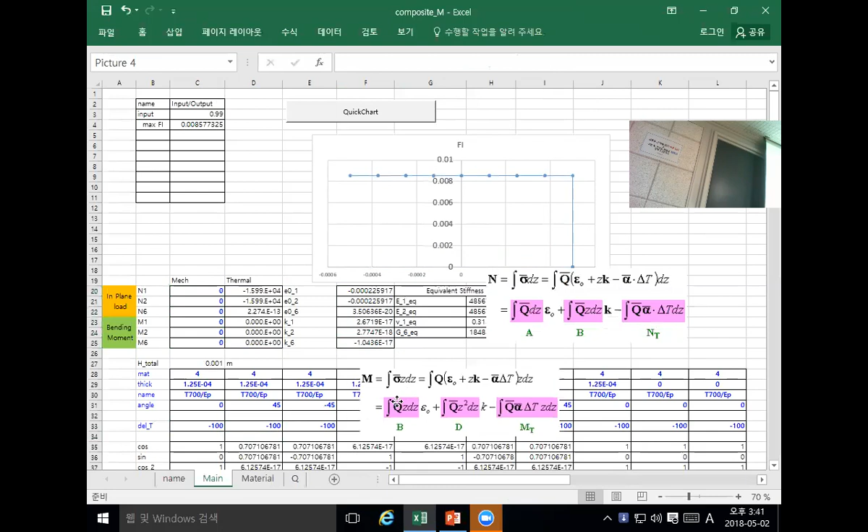And to calculate this strain, we have not only load, but also what? Thermal. Okay, so as you can see, no mechanical load, but let's say uniform temperature. I like to copy as here. So whatever we zero, all zero, nothing happens, nothing, no strain, as you can see here. This is the strain.

And strain and curvature, nothing happens, but whenever we apply the temperature, like drop, like minus 10 degrees, as you can see that failure index will develop. Certain stresses are causing it. And as you can see, everything will depend on the layup sequence.

So each layup, even though same temperature, the angle will cause different failure index because of geometric deformations, material properties, and force equilibrium and so on.

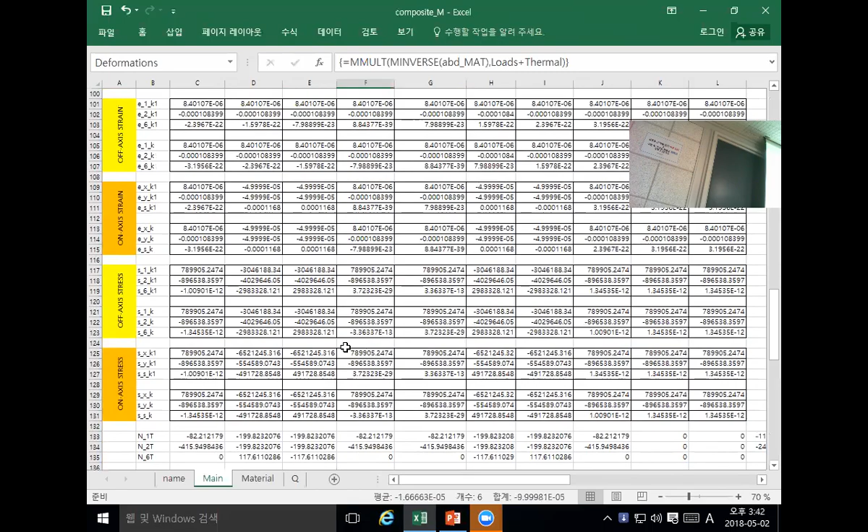So this is the one. Okay, so now we are ready. When you specify delta T, we can have a thermal load and we can have strain and curvatures. Now there's one very important step, which is where is the off-axis strain? Remember the O-axis strain is all in-plane strain and curvature, K1. This is the O-axis strain. And this is the on-axis strain, nothing but this strain transformed according to angles.

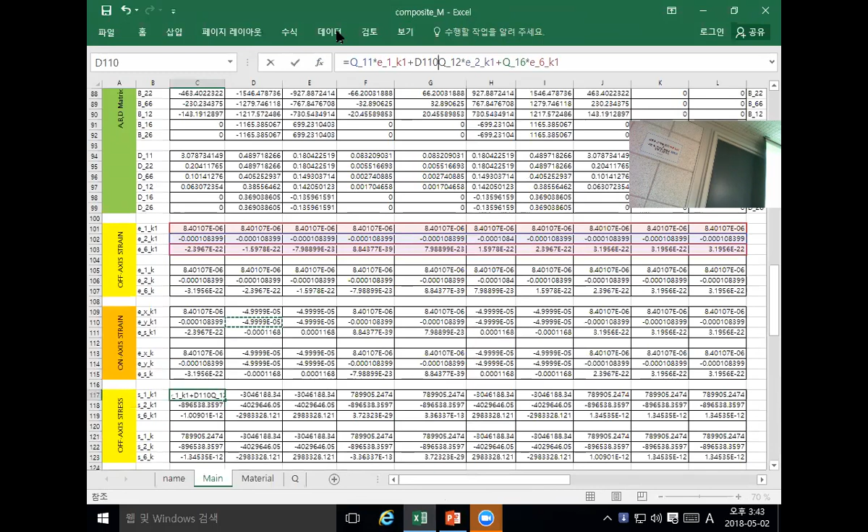Now, important point is the off-axis stress. What is O-axis stress? Remember these O-axis stress-strain relations? O-axis strain was this, and O-axis stress was this one, Q epsilon, right? But now we have alpha bar delta T that has to be in there. So instead of these terms, we need to have minus alpha 1 times delta T. Just follow these equations, and this term is often where we make a mistake, but we have to be very careful to add these terms.

This is the procedure. Conceptually, this is epsilon, the total strain. This is the thermal strain. So total strain minus thermal strain, what is that? This is the mechanical strain, and stiffness times that will give the stress. So this is what I emphasized, do exactly the same for this.

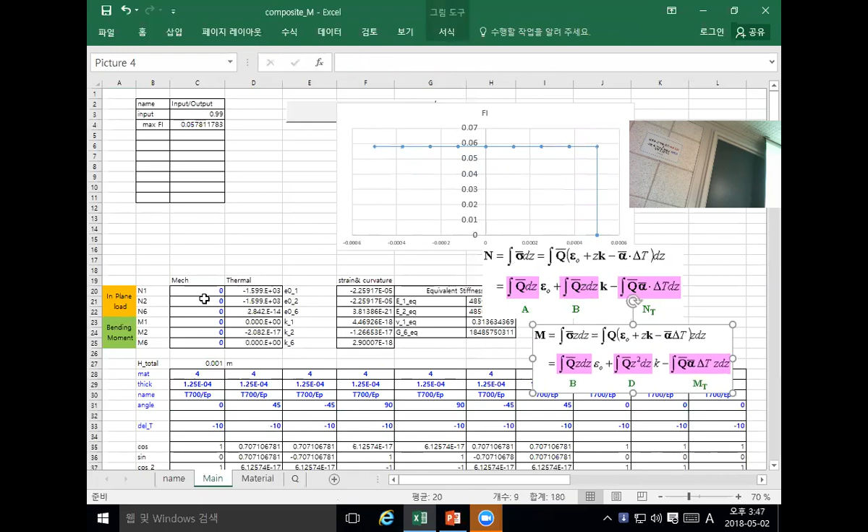Now let's take a look at this, all quasi-isotropic laminate, and each ply is 0.125 millimeter thick, total 1 millimeter thick, 8 plies, and we have no mechanical load. Let's see how much temperature would cause this material to fail. Well, it's 0.06, 0.06. A 166 degree drop and the material will fail due to the thermal stresses.

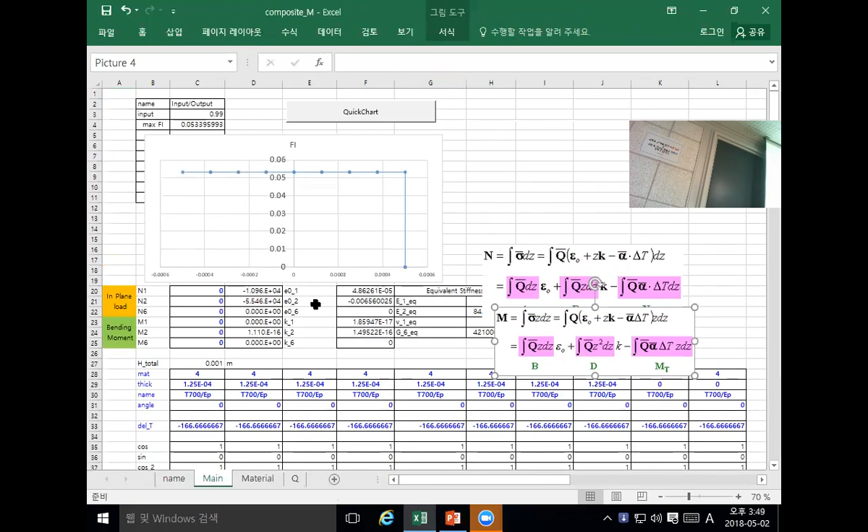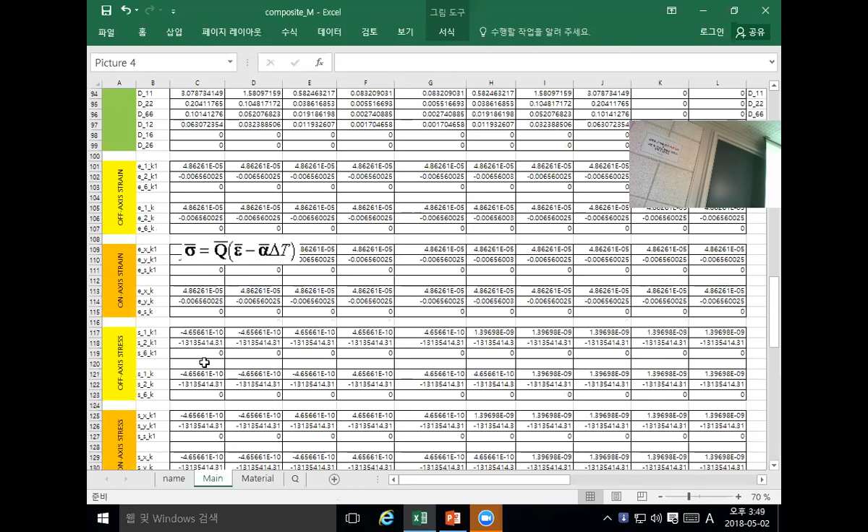Okay, well, imagine this is all zero ply. I will do the exact same thing, everything will remain the same, but just to look at this, change all plies to zero, what happens? Well, something is not right. This has to be what? All zero stress, right? Zero ply, all same angle, and temperature will not affect the stresses, but there is a small bug. This guy doesn't look good, it's too high, off-axis. Anything wrong?

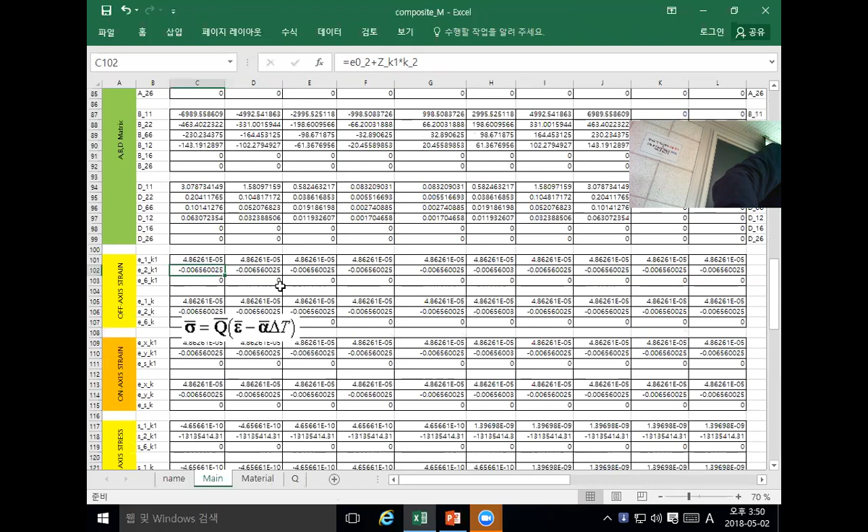Okay, this one, because we are all forces zero, delta T uniform, and zero, and curvature. Okay, here, okay, there is a bug here. This has to be, no. Oh, correct, epsilon 2, K2, Z K1. Right, okay, there is a little bug there, but this is procedure-wise correct. Please find the bug, okay?

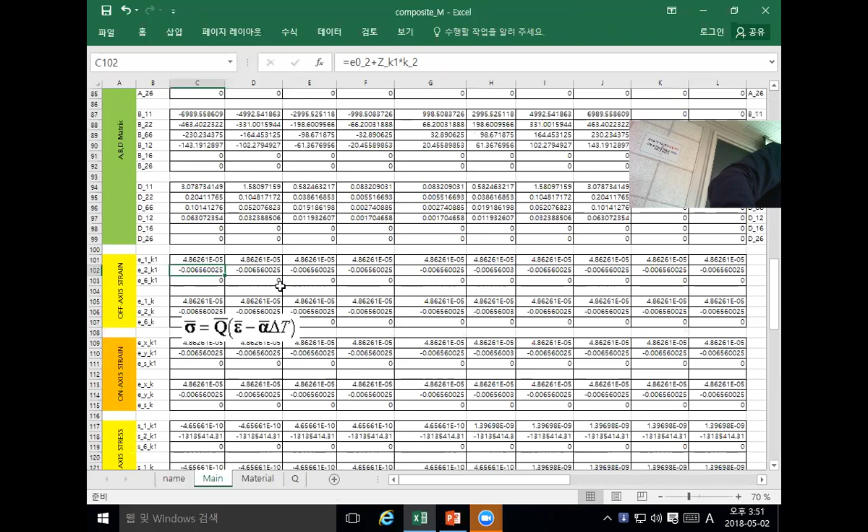This is not my code, but anyhow, you can follow my recording and check. So for this case, just for checking purposes, if it has all zero and temperature, then what will happen? No stresses, right? Because everything will shrink freely. So no stresses, no failure index. Only we have shrinkages, same as alpha x and alpha y times delta T. Okay, that's the one you can double check.

Okay, any questions with these procedures? Well, programming-wise, this is almost done. This is a tool so you can use mechanical, thermal, and layup sequence, material properties, everything, and deformations, and also failure index, which is a very important one.

And now, next step is to start with fiber and resin properties. It's called micromechanics. We always started with the ply, but we'd rather start with carbon fiber and resin, A resin or B resin, what will happen? So we like to predict ply strength and ply stiffness, that is called micromechanics, and it's very important. That will be covered in the next steps.